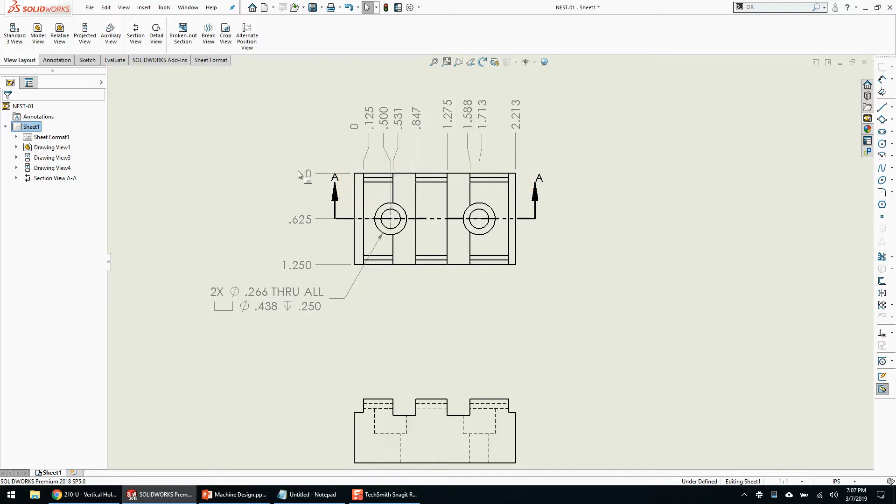Ordinates from the back or upper left-hand corner, because that's the side of your vise that doesn't move, and if you ever have a vise stop, it's almost always on the left-hand side, because right-handed people are normal, left-handed people are weird. So that's kind of how that works.

And in this instance, we have a hole callout. I must not have my normal settings loaded in here, so I'm going to override this and do what I would normally do. If you need to know more about this, you should go to the SolidWorks admin's presentations. But you can fully customize, as far as I've been able to find, the SolidWorks hole callouts to pretty much anything you want.

So in this particular instance, I would do 1/4 inch C-bore. That's what I would prefer.

In most cases there's always exceptions, and for customers we've done different things, but for most instances that's what I'd like to see. Because there's machinist handbook standards, and anything that's not to standard should be dimensioned out. If you give this to a machinist and they can't make a 2 by 1/4 inch counterbore, in my opinion you got other problems.

So anybody else can throw in their opinion. If you don't like mine, that's fine, I enjoy the banter. I would also manage white space better than this, so maybe we'll do 2:1 because those were kind of small.

That's kind of big. In the world of AutoCAD, we try to stick to nominal numbers. In the world of SolidWorks, we can do decimal places and everybody's happy, as long as we have good white space management and the details are clear enough to see, and it doesn't look crowded.

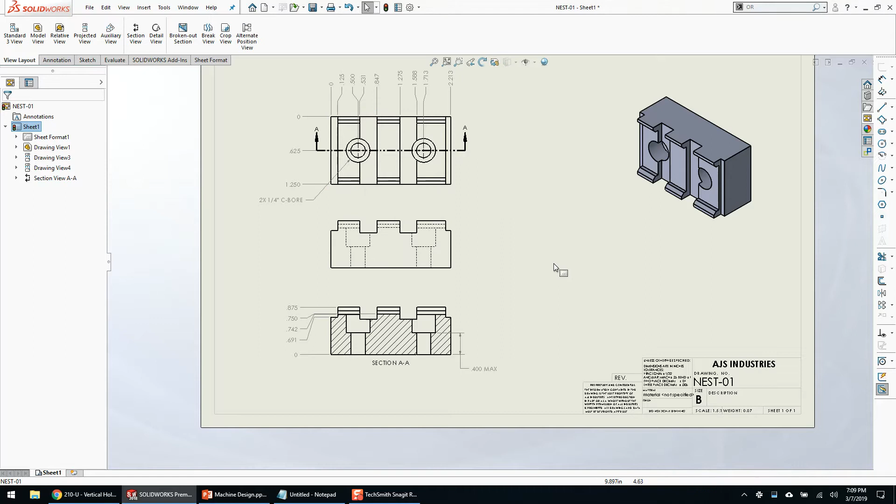But you're not undershowing your detail. So it looks like I need to do something like this, maybe, maybe not. Probably don't need that. General rule of thumb is the less number of details, the better.

Rick says I do, and he probably wants me to dimension this because that's going to be quasi-critical. So on this particular part, I probably do CNC to CAD because we're probably not going to make that by hand.

For those that didn't hear it, Rick said if you're going to CNC it, then you don't need any dimensions, and that's not what I'm going to say in my presentation. If Rick wants to have his own presentation, he can say whatever he wants. In my presentation, dimensions are important.

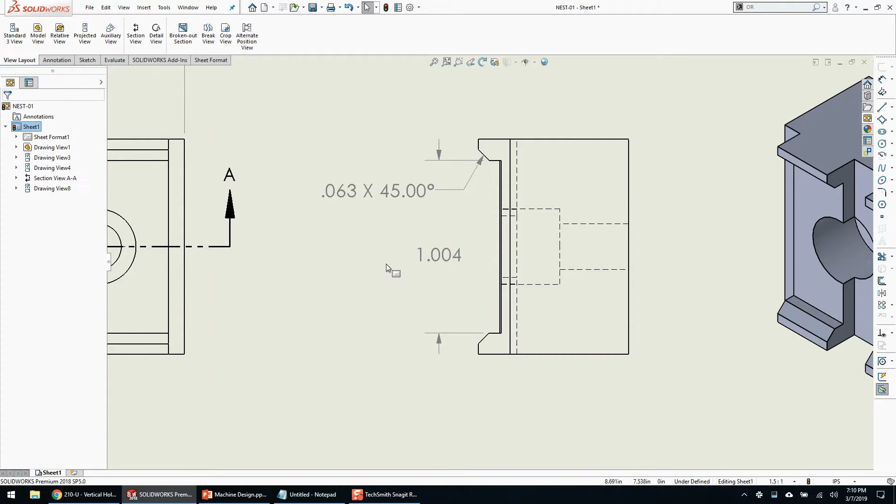So maybe you do that, and then maybe we're going to show a nice overall so the person cutting stock can figure out what stock to use. There's prevailing standards, and I think ordinate dimensions to show stock size is fine.

Some people like to see the traditional smart dimension, and they'll make sure there's at least 3 smart dimensions on their print to find stock size. I think that's a little overboard.

If the person you're trusting to find your stock and cut it can't figure out an ordinate dimension, again, kind of like the machinist thing, you might have other problems.

So a print like this, obviously missing material, missing description, that kind of stuff. But as far as the construction of the print, doing it here in the last 5 minutes and just glancing at it, we'll add a note for sure, right?

CNC to CAD data, right, you've got that. I might copy the note and paste it over here to be clear about what we're asking them to cut. But generally at a rough glance, this appears to be a completed detail minus the metadata. I don't know if anybody has objection to that.

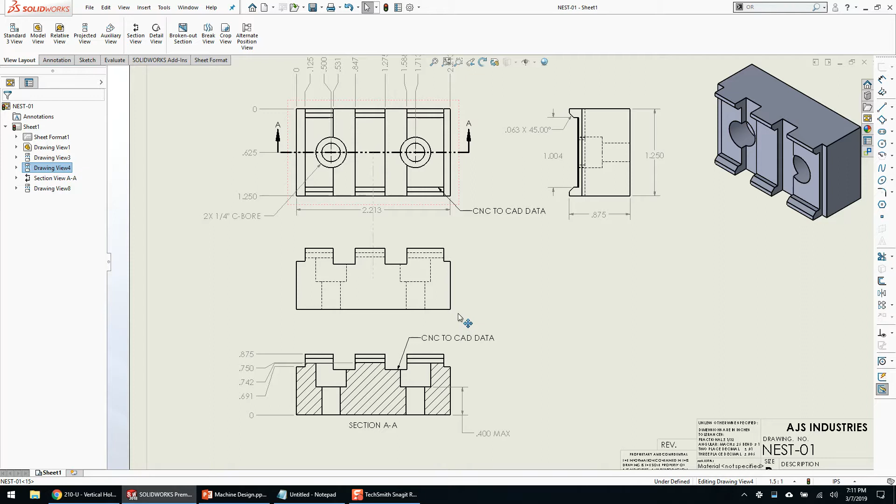It is, you're right. Yes and no. My fear is that if you look at this, it might—well, the ISO helps. I could go either way on that, but I'll take it off. Make Paul happy. All right.

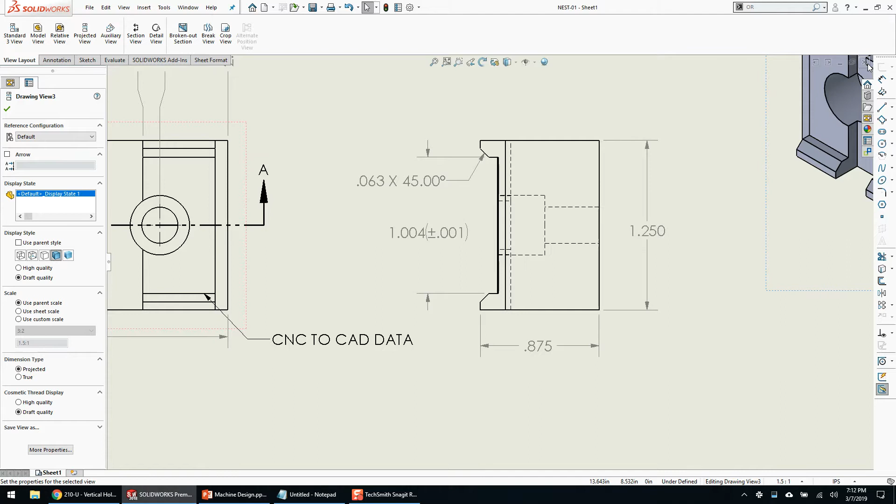Tolerances matter. Yeah, and I don't disagree. In this particular instance, because my friend Jerry isn't sitting here, I'm not quite sure how tight they're doing it. That one dimension there, right? Maybe this particular dimension would be the only thing that's reasonably toleranced, give or take. So let's say it's plus or minus a thou.

You don't want to go plus or minus a number. Why not? You should always go for the number and either plus tolerance or minus tolerance. You go for the main number and then you're overshooting the tolerance more.

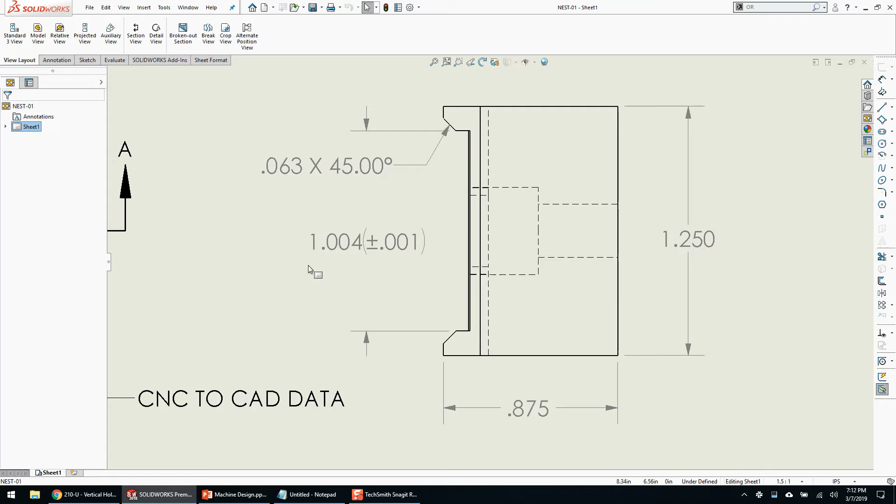In my machining days, whether it's a number plus, a number minus, or a plus or minus, you always machined for the mean and just shot for the middle. So if this said 1003 plus 2, I would still aim for 1004. I'd always machine right for the middle in my machining days. And in this particular instance, you'd go small on the first pass, but clean it up on the next pass, aiming for the middle.

Yeah, it depends on what you're trying to accomplish. If that was 10 thousandths clearance on each side, if I remember the fixture from last time, and I want a minimum of 10 thou, a maximum of 14 thou, then yeah, you'd plus 2. If I want 10 thou, but 5 would be acceptable—it all depends on what you're trying to accomplish from a manufacturing and design standpoint. Rick's not wrong, but because it's my presentation, I'm going to say that's okay.

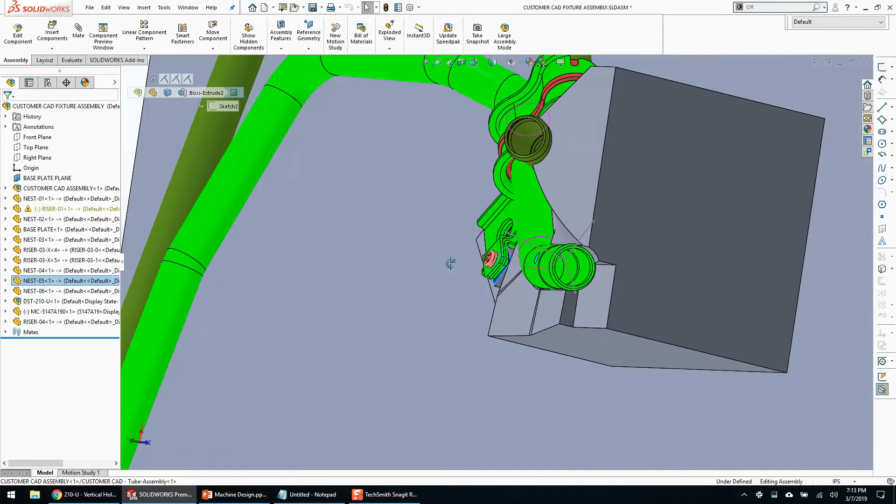All right, over here we had to do something. I think Jerry said they're driving that screw. I think we did that block already last time. I think we had to hold the pipes, hold the bracket.

Oh, we needed a Destaco clamp here. That's what it was. All right, so because this particular block is the way that it is, it would make a natural bolting area for a Destaco clamp. So let me rotate this part here and save and get out of it.

So for those of you that aren't aware, there's two different ways to open a component in SOLIDWORKS from the graphics view or the feature tree. Because I'm not super familiar with this component—I drew it three months ago—and because the orientation of the part is important to me, when I click open, we're all familiar with the far right hand or the far left hand open side. One over is open part in position.

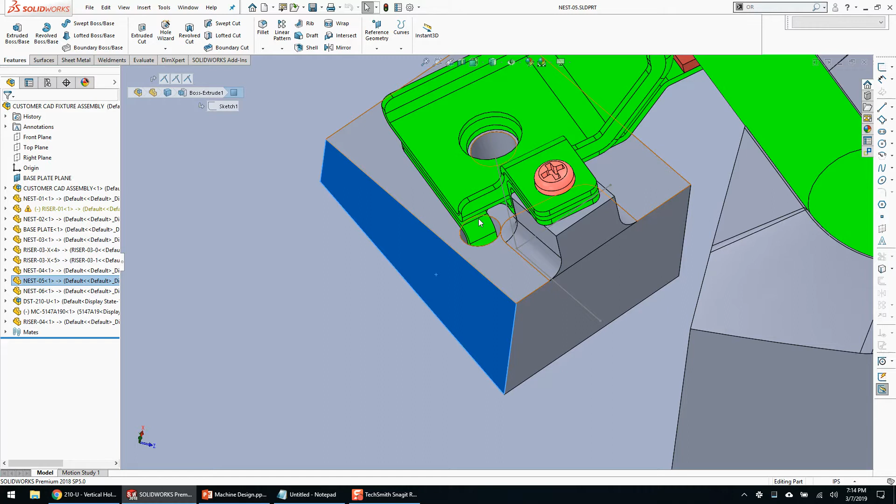The in-position option is pretty cool. When you open it, it'll open the part and then rotate it to be in the same position as it was in the assembly. So I know this is the face that I need to elongate. If I wasn't super familiar with that part, or didn't exactly know what was going on, I may not necessarily know that.

So instead of trying to figure out what dimension to change, what the design intent is, let's say I took this design over from one of you guys. Instead of figuring out the external references and what's going to blow up based on what I change, the cheater way of doing it—which in machine design, there's a lot of cheater ways that are perfectly acceptable. If this was product design, I would write somebody up for this.

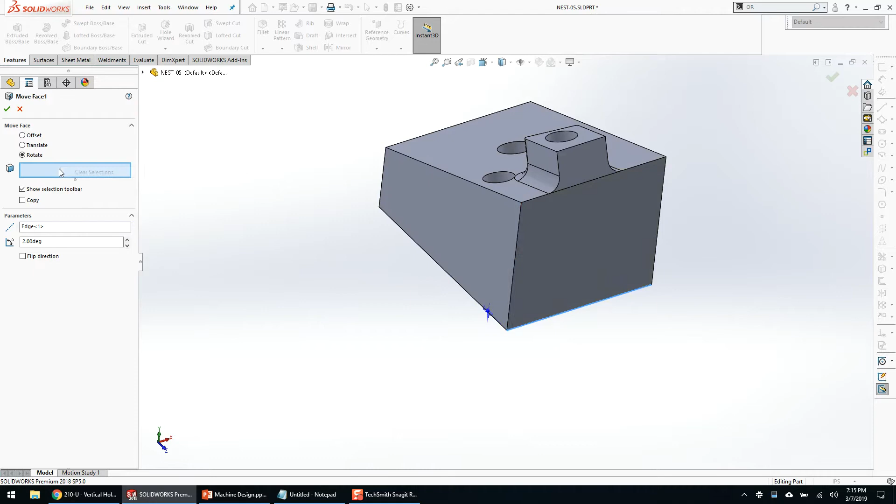But I'm just going to click Move Face and make sure my parameters are set to that edge, and then maybe say 2 inches. Did I do that right? I did not do that right. What did I not do right? Oh, I picked a face. Let's try picking an edge. Nope. I did pick the right edge. Whatever, let's just move it this way.

So in SOLIDWORKS, you can pick on any face you want and move, rotate, translate, a few other things. So let's just say that's 2.5 inches. Now the reason I did it this way, and why I say it's cheaters, is because from a design intent standpoint, that's really poor. But whenever I made that block, I got an error.

Where'd that error come from? What's an error about this? I think that block might have moved or something. Why is that erroring? Did I change something on that?

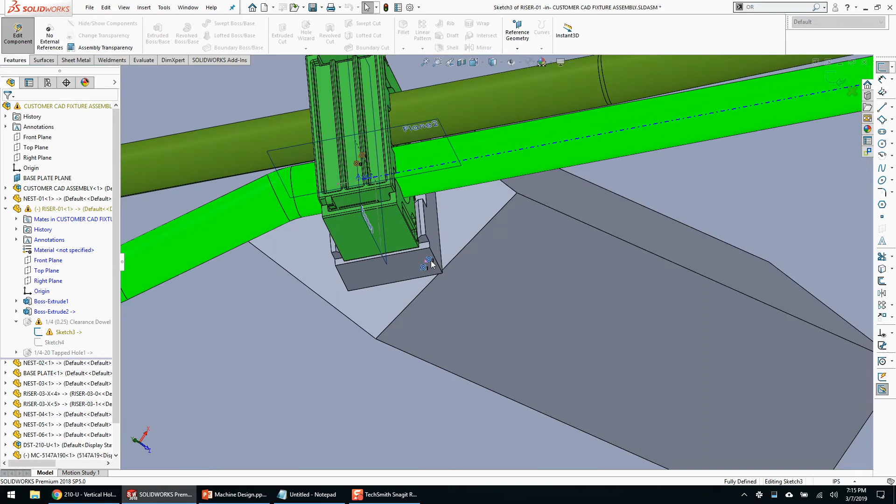Did I not save? Did I delete my dowels? I don't remember doing that. The video will tell us.

All right, well, you all saw me do it, so we'll just pretend that it's done.

So if I knew I needed a destaco clamp on this originally, I should have made that block longer originally and done it more intentionally. Because I didn't...

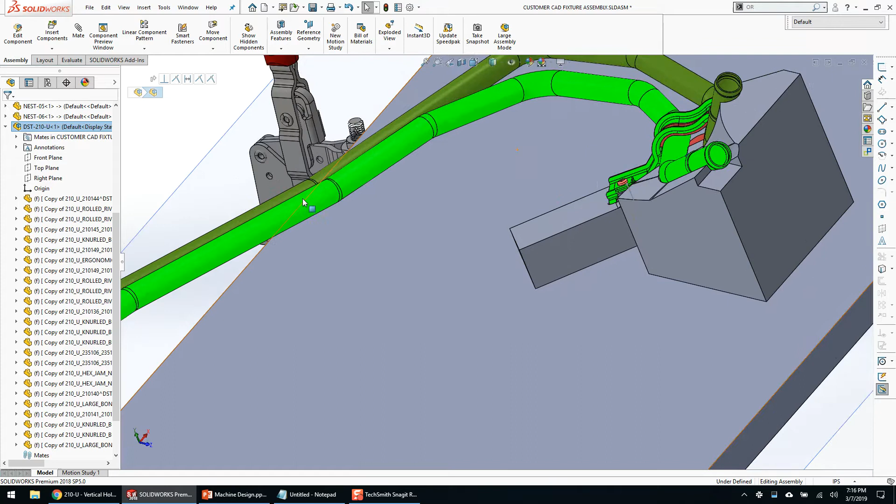Pretend it's a takeover design or something like that, I now just want to take this destaco clamp, holding down the control key, I can drag a new instance of it in my graphics view, pick on my select other, grab the base, make that in place, move this around.

Right click to drag to rotate, move it about to where I want. Looks good. Right click, drag a little bit more. Hopefully I can mate that up. Whoa, look at there. Mate that up to that edge.

So since most of us weren't here on your first presentation - yes, sir, what is your preferred method for orientating the block to start with? This block? So I don't know because I don't remember what I did verbatim.

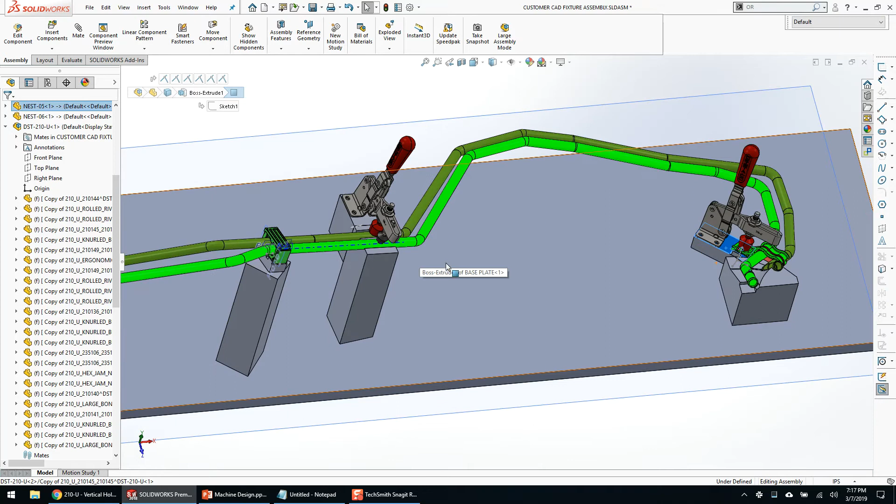So I'm going to think through what I would probably answer and we'll see if it's correct. So this block we rotated to make sure we only had the single compound angle, not a double compound angle. This block, what I'm guessing I did, and because I just broke my assemblies in the beginning, let's edit this and try to figure it out.

What I'm guessing I did is I made a sketch triad in 3D space, and then I said that it is parallel to the plane. Okay, so I knew I needed a hole so I can put an alignment pin in here.

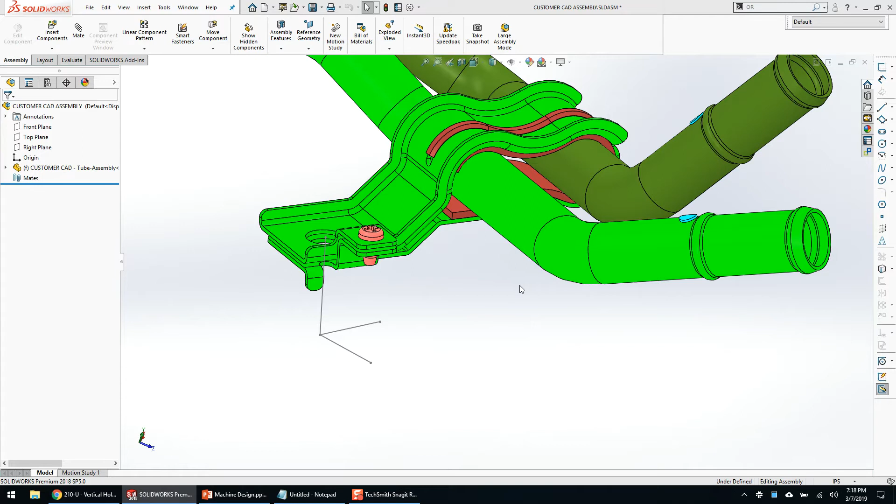I'm trying to figure out how to explain it without breaking things. Okay, I'll try to explain it this way. Get rid of that part, get rid of that assembly. So this hole is at an unnatural angle to this plate, and so I need to rotate my block in a way that I only have one angle, which is desired.

And you can do that by creating a sketch. I'm just going to delete that. Okay, so that's what it was.

So if you create a 3D sketch, that's the key. I see a lot of planes and a lot of axes, which is an acceptable way to do it. I find them very kludgy and messy, hard as a user to control and do what you want dynamically. They're not dynamic features.

I really like 3D sketches, and thinking back through here and looking at what I'm doing, looking at what I did, this is what I did. So I made a 3D sketch, and this line here is concentric to that hole, and then I put a triad on here, and all I want is the bottom of this triad to touch that plate.

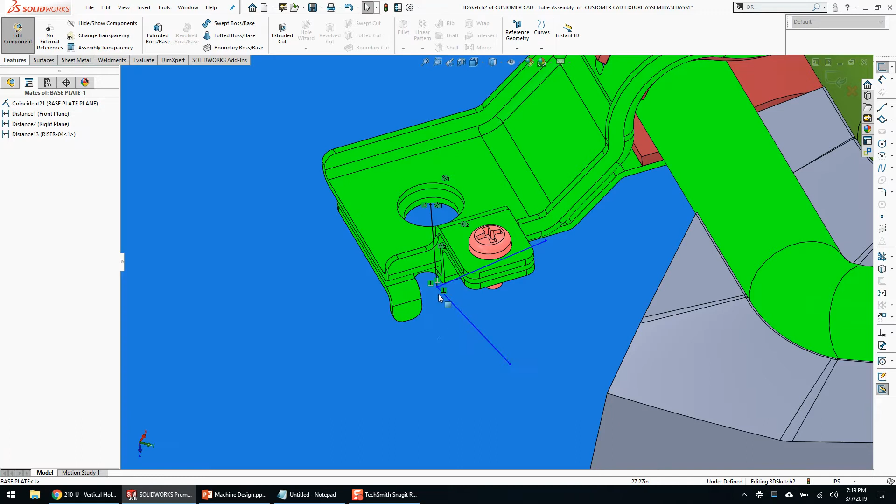So I can click on that plate, click on the center point of that triad, and then there's an on-plane relation, which if you've never played in 3D space, you may have never seen. But imagine just a line in 3D space trying to touch a table or something, and there's an on-plane. Coincident doesn't work because coincident is only on a projected view.

If I'm drawing a 2D sketch on this face, I can coincident to an edge. But you can't coincident on a non-projected view. So on-plane basically is your pierce point - where does this sketch go until it hits something? That's an on-plane relation.

So let's try to exaggerate this a minute. Let's pull this up. So if I click on that and click on my plate and say on-plane, that triad sketch is going to drop down until it hits that plane.

Now I can take any one of these members. I'm going to guess this one. If I change this too much, things are going to blow up, which would be fun. And then click on my plate.

If I do a parallel relation, so again in 3D sketch mode, we've got some non-typical relations you may not be exposed to, but there's make normal, which is basically perpendicular. There's an actual perpendicular, which ironically is different than normal, because normal is perpendicular in two axes. Perpendicular is going to only be perpendicular on one axis.

So this is a perpendicular line to the table, sorry for everyone on the internet who can't see my hand. And it could still be perpendicular like this, because from here to here is perpendicular. Normal is going to be directly opposed from that surface.

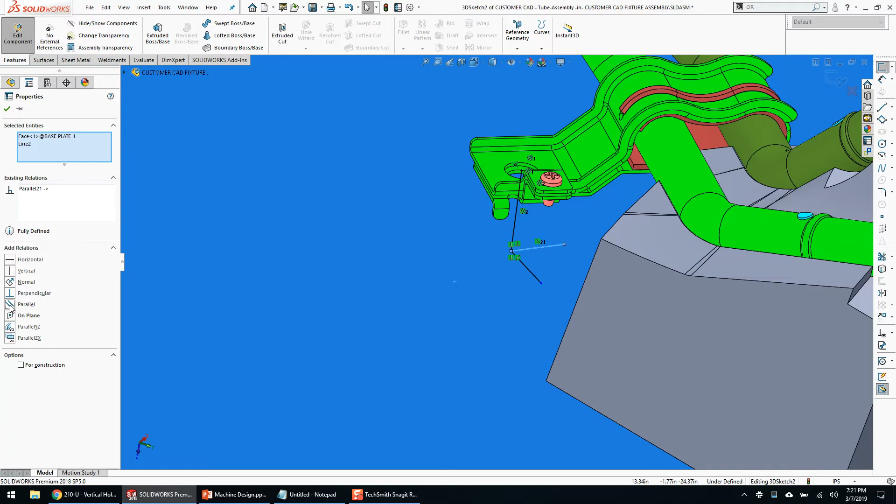And then there's on, or make on plane, make parallel to X or Y, make parallel to Y-Z, or Z-X planes. So in this instance I think I want parallel. You can see the triad move until this line is parallel or otherwise touching, or it would be on plane would be another way to do it. I find the parallel relation to be more robust.

So then basically this triad has rotated to the point where if I put a block there, I know that I only have a single angle that I have to construct.

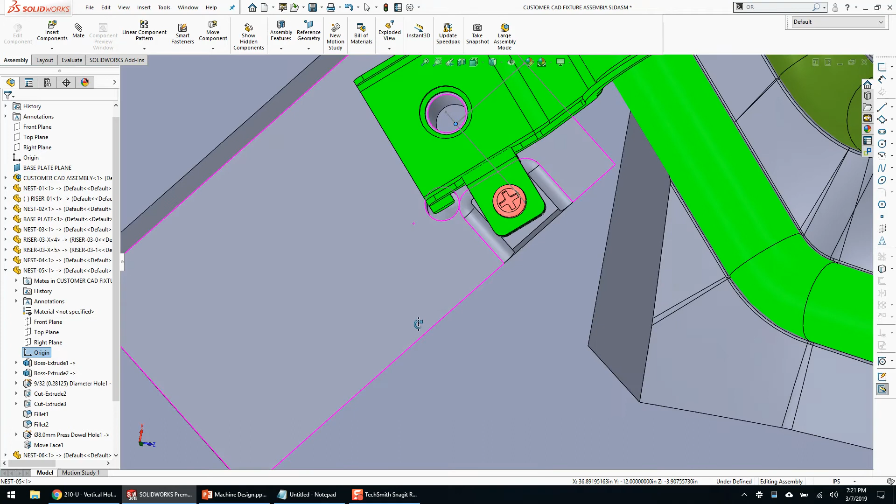So if I didn't blow up anything too badly, we show our block again, I'm assuming we're going to see the block constrained. So you can see how I used the center origin of the block, because all good designers design their parts center origin base feature. So the origin of that block is basically at the origin of that triad where that 3D sketch from that hole touches the plate. Does that make sense?

That's part of the reason why I didn't extend the face, because I didn't remember all of that, but I assumed there was something important about where the origin was and the good design intent, so I just wanted to stretch that face out and not necessarily worry too much about what I had done or breaking it.

It's been a really interesting experience for me doing these 2 hours, 3 months apart. It's almost like Rick just gave me his design, because I don't remember what I did 3 months ago, much less in the 2 hours I tried to cram through this stuff. So this has been really fun for me. Hopefully you guys like it.

And you'll kind of see that I still have a lot of those sketches turned on. So I did do an axis here just because I needed a single line down the center of that tube. So that makes sense, 3D sketch does not.

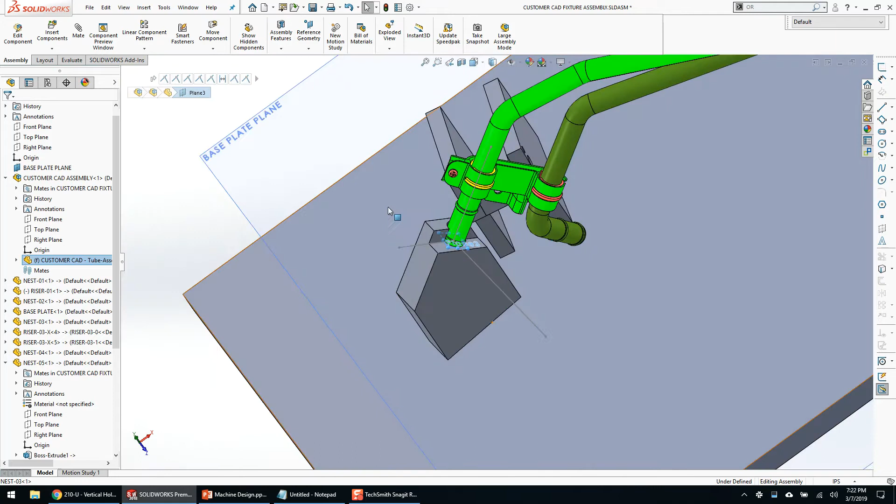But then over here it's going to be the same thing. I wanted to make a single angle on this part and make it against that plane so that we could put the part on there. So I just drew a triad 3D sketch centered on that tube, rotated this till it was parallel.

And this is a lot easier to see, right? We can see if we measure that these are parallel. And so as long as you can orientate your part perpendicular to that parallel edge, it makes for much more simplistic machining and a lot simpler setup, because instead of planes and axes and multiple stuff, that's all compounded and I think not flexible and pretty kludgy.

This works really well. So I don't know if that answers your question or... Yeah.

Any other questions? Trying to get to the point of design intent. Good question, Todd, I got it. Is that how you would have done it?

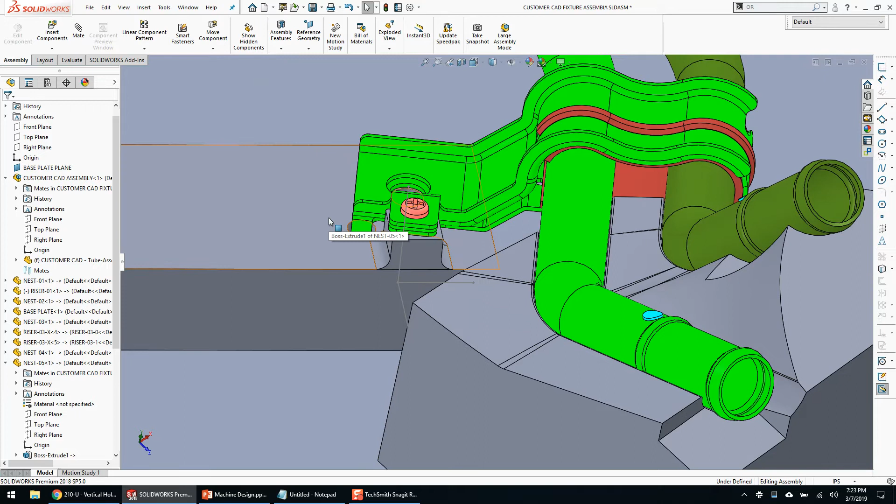Similar. Okay, sweet. Probably, I use planes a lot for orientating it. I like planes when there's no other option, or like in this instance, it's a reference plane, right? Because I want to work down to this plane level, so that makes sense if it's transcending parts and stuff like that. But yeah, anyway.

Yeah, I worked off the center of the part. Good man. Your first extrude should almost always be a mid-plane.

All right, so it looks like I need a little bit more over here. I don't remember if this trick works or not, but let's try it. I want to extend this face over. Yes, I'm being sloppy, let's constrain that.

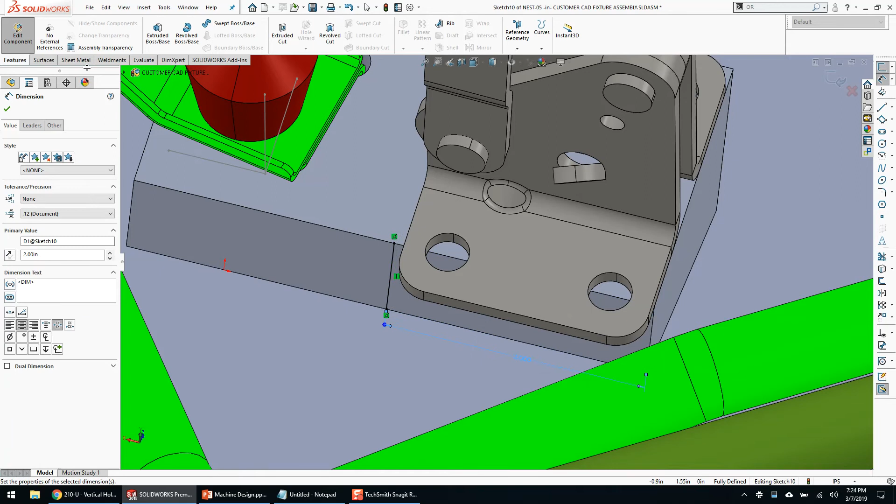In that instance a coincident would work. This is going to be 2 inches, let's just say. And under features, under curves, there's a split face. I think I can split that face.

Now, is it going to let me move that face? I don't remember if this works in this instance or in a certain other instance. Where'd my triad go?

Nope, does not work. All right, no problem. I don't remember if this is normal enough to do. It should, if it's simple. So I should just be able to convert these two entities, convert that one, flip the inversion on these, draw a vertical entity, connect those up.

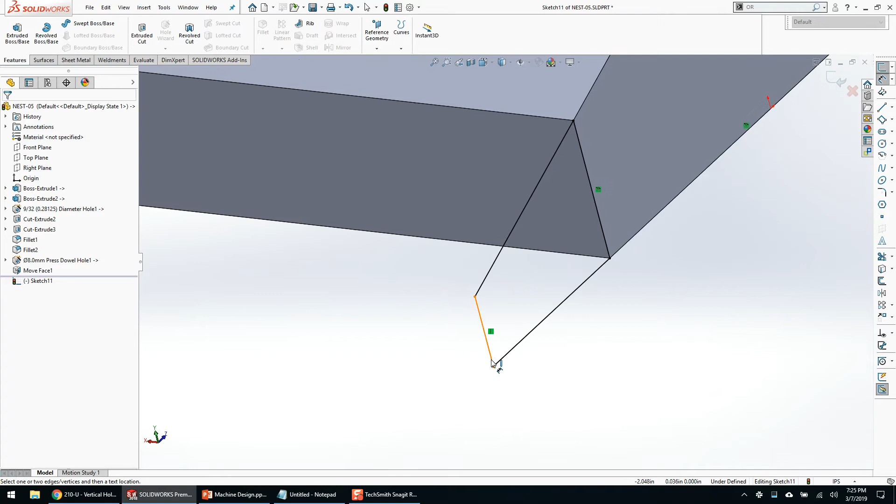Merge, not coincident, that's always fun. In this instance, what's important to me is the distance from here to here. I'm trying to meet that clamp. So I don't know if 3 inches is good, but we'll extrude that this way. 2 inches, I think, was the number there. Good enough.

Where am I working? Here? Yeah. All right, so the clamp base is roughly 2.5, so we'll do that.

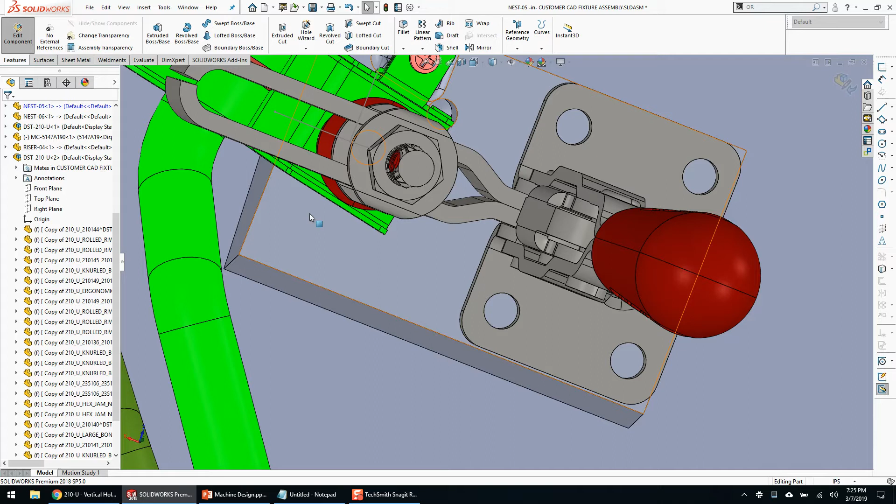That looks good. So put in holes, I think we've all seen holes. I could probably have run that extrude all the way or just done a face because I don't know that room is going to be at a premium. So if you just double click on a face on an extrude create or an extrude edit, it'll change that extrude end condition to up to face. It's a really easy way to just double click. The face turns pink that you double clicked, the feature changes to up to face, and then you can right click to rebuild. Kind of a fun way to quickly power through that.

So put in mounting holes again. In this instance, because I don't perceive there to be any interference, I would have to do holes at some point before I give the design off to manufacturing. But in the scope of what I'm trying to do today is to see if the design fits, to get to a design review state.

Because when you're designing like this, assuming you work in most normal environments as I do, you have to get to design review state first. Your boss or your customer or somebody reviews it, signs off on it, yes, that's a good design. Yes, the Destaco clamps work. Yes, SMC is approved pneumatics for this vendor, whatever it might be.

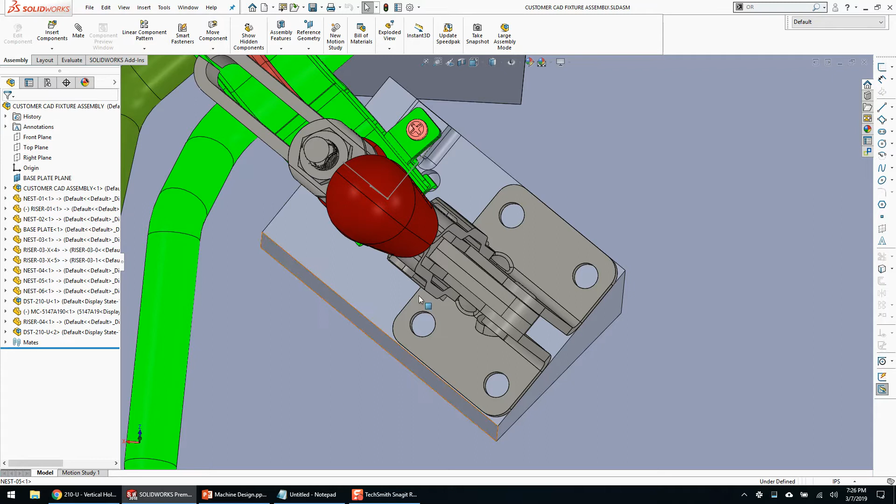Then you go back and add all the detail. Adding holes now would probably be, there's probably no way in which I would save time, because if I add holes now or later, it's the same time, but there's a higher chance I'm gonna lose time because the two constant rules in design are everything changes and everything breaks. So there's no reward and only risks to add the holes now. That's why I would not add the holes now.

I'm sorry? Is that why SolidWorks crashes?

Can't answer that. Do they have to meet the rule? Oh, because everything changes and everything breaks? Yeah. No, looks like I didn't finish this part. We should do that, that would be fun. So it looks like I need to relieve this a little bit more because there's this ring around there.

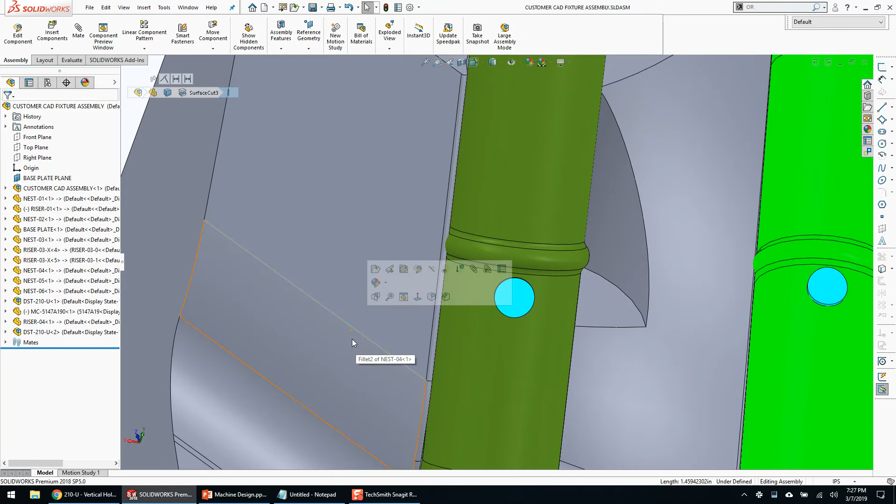I'm just not ADD, although I am a little bit, but constantly while looking at things, I always look for interferences, right? SolidWorks does a really good job at showing you a soft line or a soft edge. A hard edge has these black lines on them. And so anytime you see a hard edge, you know that you're seeing the abrupt edge or a tangent edge or something like that from your design. So I just noticed that this is a soft edge where you don't see a hard black line, you just see the melding of two colors. So that's going to tell me that we have geometry interferences.

And there are evaluate tools that you can do that. There's clearance verification. This is probably going to take a long time to run or maybe crash, right? Who knows? So I have to select the entire thing. This is kind of where the automatic tools in SolidWorks are frustrating. Okay, you surely should have detected a clearance. A, they don't work very well evidently, or I don't know how to use them.

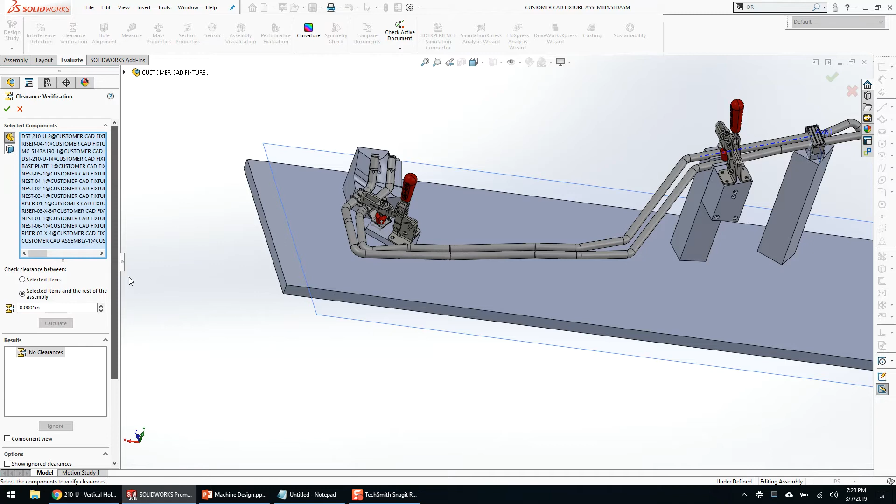But B, if you don't know exactly what things you're trying to check between.

Okay, now it worked. Oh, but it's finding interference on itself. That's not helpful. Well, there's some settings. Obviously I don't use this very often. I've never found it terribly helpful. Maybe if I was better educated on it, I would find it helpful. But it's the same thing with the hole alignment tool, I just don't find them helpful.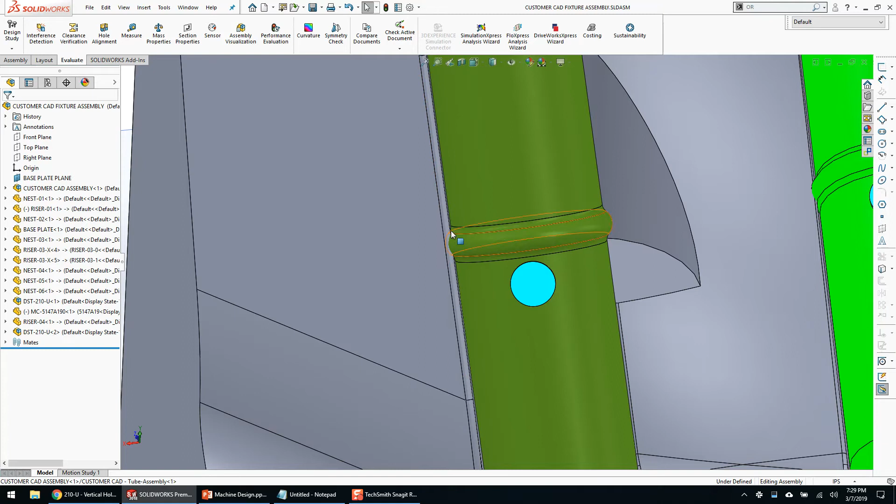It is very helpful, but there's settings farther down you've got to get right to show what you want. In a multi-body part instance, I do a lot of that from a Boolean operation. In the assembly, I don't know if I just got lucky or spend too much time looking at my designs and catch them myself. But in this instance, I noticed from a soft edge to a hard edge standpoint where the green and gray are melding, that's a problem.

So it looks like I did a relief here. I don't know if I didn't define it—hey, look, I didn't define it, and the relief moved or something. So let's figure this out. Let's move it over here.

And again, if this seems unscientific, it is. Sometimes it's not specific enough to matter. Like as long as we're holding the tube up here and holding the tube down there, whether I remove an inch, an eighth of an inch, or half an inch, nobody cares. So spend the time and add specific detail and accuracy when it's important, and when it's not, don't spend the time. Part of being a well-seasoned, good designer is knowing what to spend value-add time on, and what to skip over.

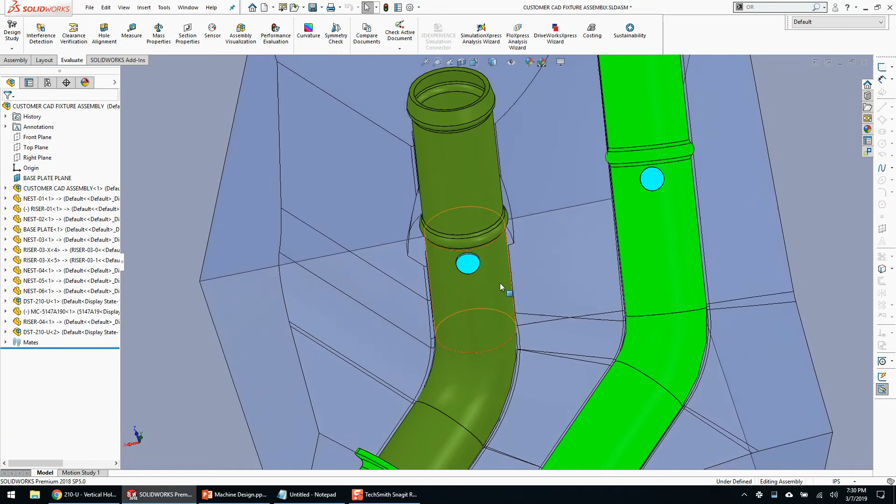So that's certainly my clearance rate. I could easily adjust that and clean it up, and probably would when I get to the detail side. But again, from a design review standpoint, this is now design review ready—I could show somebody, and maybe my customer or my boss is going to freak out that I have a sharp edge here where they could catch the tube on it. So maybe I have to fix that sharp edge.

So maybe, and again I opened it up in position so I can find that easily, maybe I would move this cut above the fillets, edit that fillet, and see if I can't fillet that edge as well to soften it. Go back to SOLIDWORKS assembly, and maybe that looks better now.

Whatever, who knows? Maybe I should radius the edge up there, but you're not going to be able to get a ball cutter in, so you're going to have some problem there.

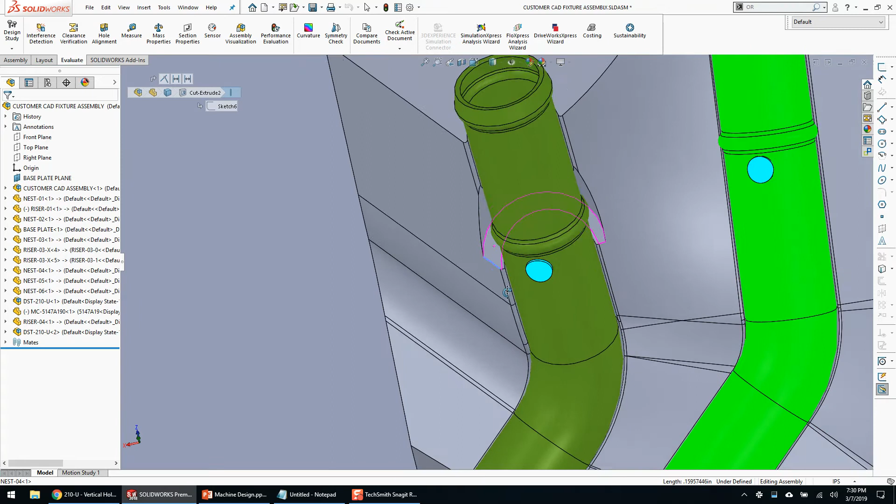But that's the concept. So you've got the staple clamp holes. Looks like we can still get a screw gun in there, although it depends on where the operator is. Is the operator on this side? Looks like it, so at least the screw is forward of the operator from the staple clamp. Otherwise you might need a low profile clamp or a clamp from the other direction to gain access to that screw. So not only think about the machinability of it, but how is the operator going to use it, and how friendly would that be?

Pretend we need to put another staple clamp on there, but it's pretty much the same as that, and you all saw me do that already. I'm guessing that's an alignment pin, and we need a staple clamp here—you saw me do that already.

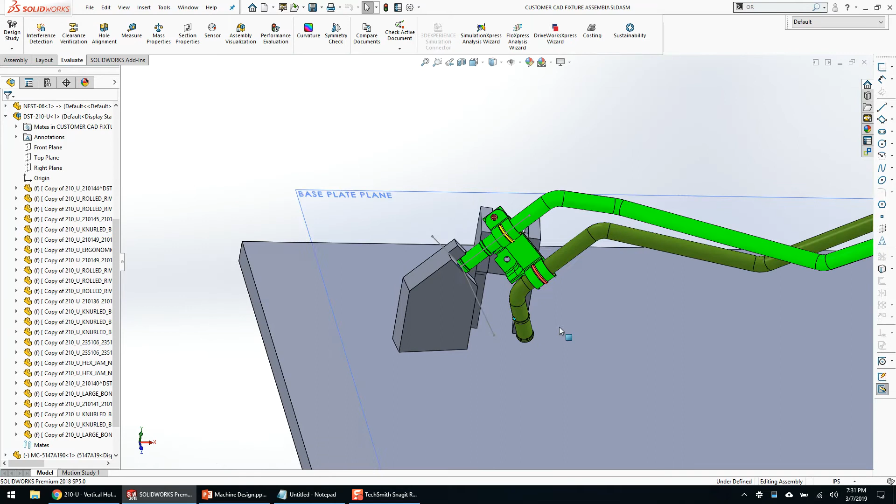So I don't know, I can make more 2D drawings. We could add a pneumatic cylinder and just make something up. What do you guys want me to do?

Show the clamps open. You had to say that.

So when I downloaded this as a parasolid, it just dumped it as a bunch of parts. I made the parts virtual, so they're all embedded into the assembly. But this is just a fixed blob right now, so now Radar wants me to make it an unfixed blob.

So this will kind of be fun. You first have to identify the components that you need to unfix. So those first four, handily enough, don't need to move, neither does that one. So I'm going to put those in a folder called base.

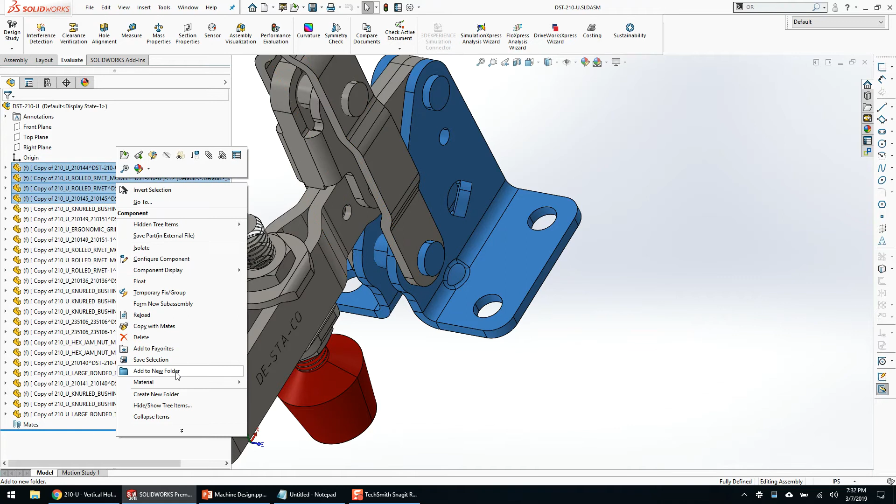All right, what's next? So that should move together, and then here's the other thing - I hover over here and I don't know what that is. It's something in the middle, guessing one of those rivets or something. I don't care, so I'm just going to delete it. It's a virtual part, it's gone. Oh, wrong part - I don't care, it's a virtual part, delete it, it's gone. I'm not going to spend the time.

Unless your designs are so big that extra detail on a staple clamp is going to radically slow down your computer, I don't necessarily need to spend time cleaning this up. But if I do have to clean up and show kinematic motion or do something, then I don't want to spend time on unnecessary geometry that serves me no value. That's why I didn't bother cleaning up or deleting anything before, and why I am now.

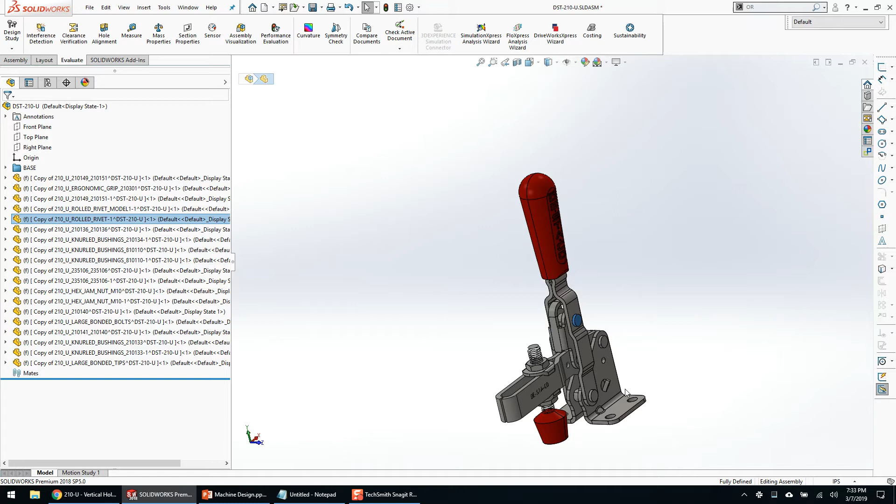All right, so we've got these components that I think need to move together. Oh, not the last one - just those. It looks like I got a couple pins I could include. So again, I'm hovering over and seeing the graphics previews to see - what are those little washers? That's frustrating. Do we care about those? Nope.

Okay, so we got handle, handle, handle, pin, bushing or something, not sure. This is the problem with imports, right? There's no particular rhyme or reason.

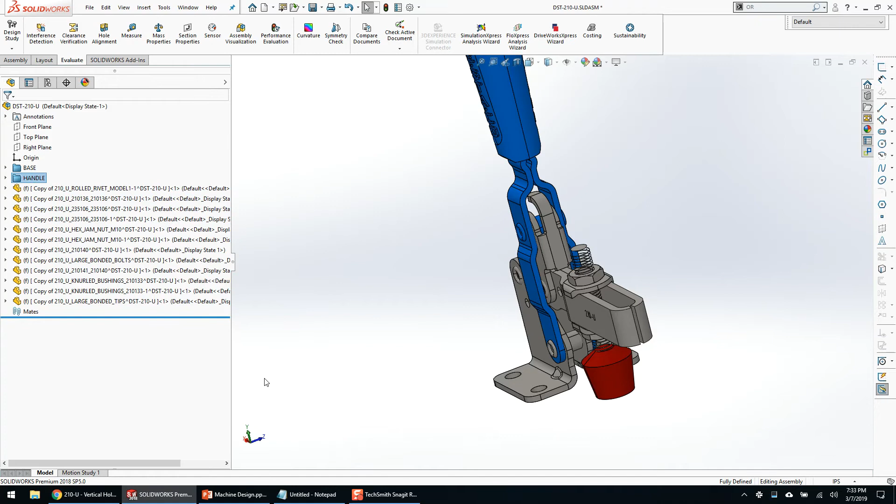Okay, I think that looks good. So that's the handle group. And then I think that's going to be the link group. Okay, all of this is fine.

Again, I'm not sure - I think that's a bushing or something down there, I'll just delete it later. Not sure what that is, delete that later, and that. Okay, so this is the arm group, and these two things we're just going to delete because I don't know what they are - not serving me value. So now that I have these groups, I'm going to unfix them one at a time.

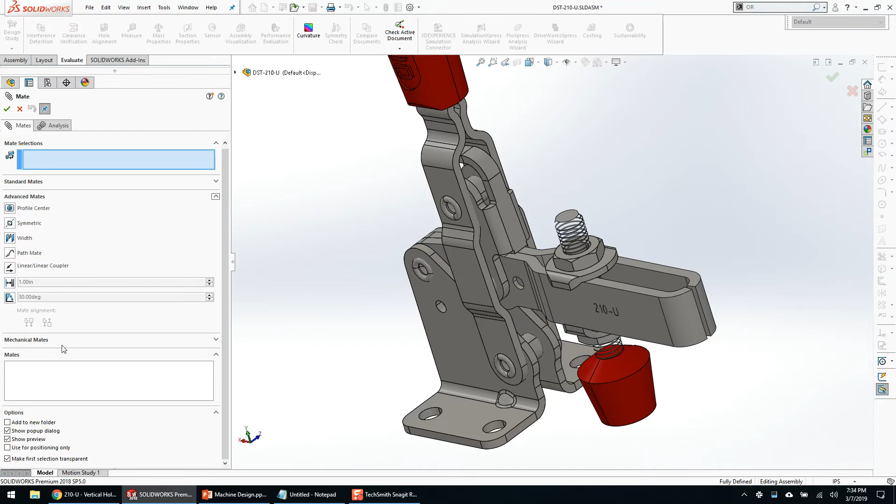So, floats, shift select them again, and mates. In advanced mates - nope. In standard mates, yep, you can do a lock mate, and basically lock all of these together. Come on, SolidWorks. Let's try that again. Shift select, mate - well, that's irritating. Seems like I've done that before.

Okay, let's try it a different way - pick them in the graphics view, maybe that's faster. Well, let me pick two. What have I - I've done this before. Okay, new idea, we're gonna shift select and say form new subassembly.

And the new subassembly is gonna be called arm, and we're deleting the folder. Another good instance for the use of virtual components - I created a subassembly, didn't create a file on the hard disk, didn't care. We're gonna create a new subassembly again.

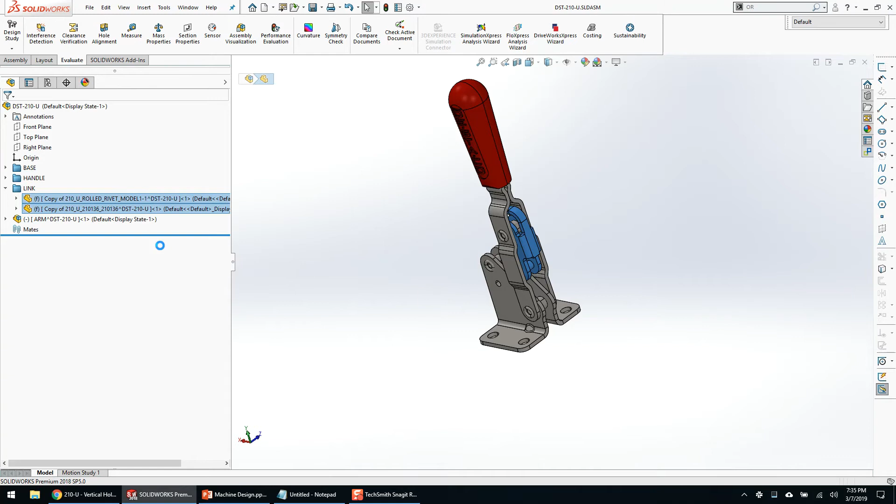Calling this link, deleting the link folder. Create a new subassembly for handle - again, just selecting on it and F2 will do a rename. Handle, delete the folder again. I don't really care about this, I don't need to create a subassembly - it's just all fixed, it's the base.

It's fine, whatever. So now I should be able to drag these subassemblies around, and I only have to make the mates of the subassemblies that I care about. I don't have to mate every single component. Now obviously, if you open up the assembly and start dragging stuff around, things would be bad, but they're all fixed inside of their relative subassembly, so I'm not too worried about it.

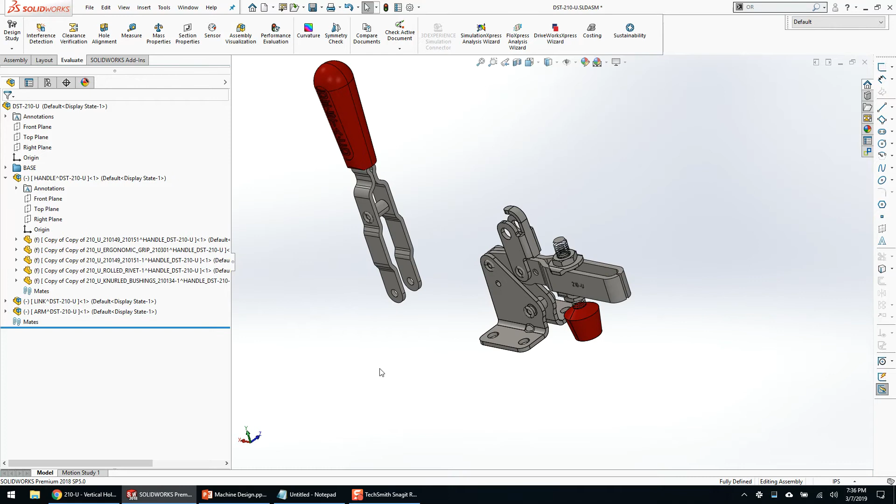So let's just undo these so I know how to mate them up. So let's grab that and do a concentric. And then let's grab this and that and do a concentric. Let's grab that and do a concentric. And then let's grab this and that and do a concentric. Now we should be able to see they're all working together.

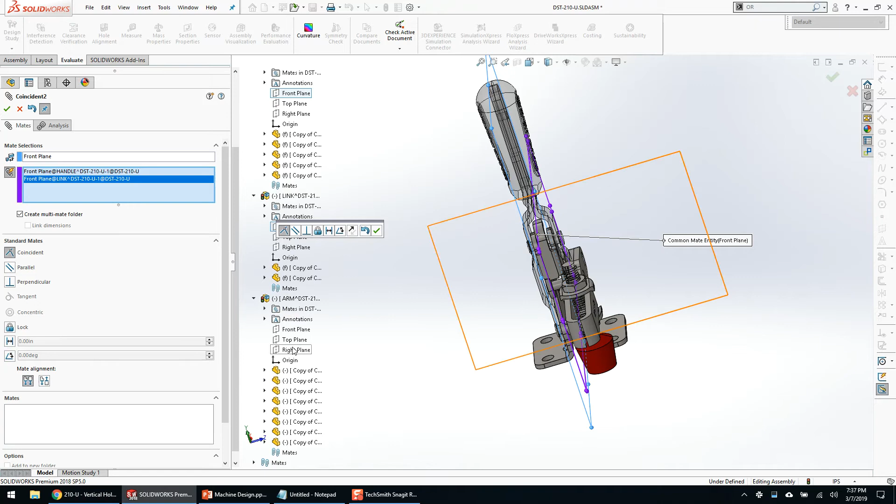Good, so now let's see if I can find a center plane like that. Let's see if I can run a multi-mate on the center plane. See if I can, by random luck - my assemblies should be created at the same origin of the collection of parts, so the same front plane per subassembly most of the time, if done what I did, should work. So with a relatively minimal amount of work, it's the smallest amount of work I know of how to get there. I don't know if anybody else has a better way.

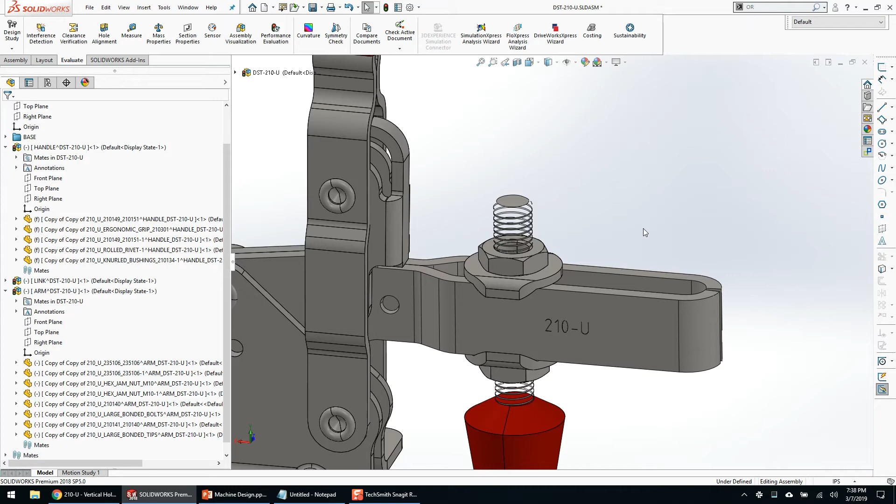For my one-off fixture machine design, I just get it out the door, because I can't justify an hour of cleanup if I'm not going to use it in multiple projects for the next 30 years. Your profit value, cost of opportunity, and return on investment differ greatly based on your industry. So if any of you are from FOG and say this would never work at FOG, I agree - FOG has different policies, so on and so forth.

But this works really well. The subassemblies, the common coincident mate - notice I have a multi-mate here, which has one plane of my base assembly with three other planes. Your multi-mates are helpful for cleaning up your mate tree and speeding up SolidWorks, because SolidWorks only has to find that one common reference and matches these three common references up to it. If you did three individual mates, it has to find one reference mate, then the same reference mate again.

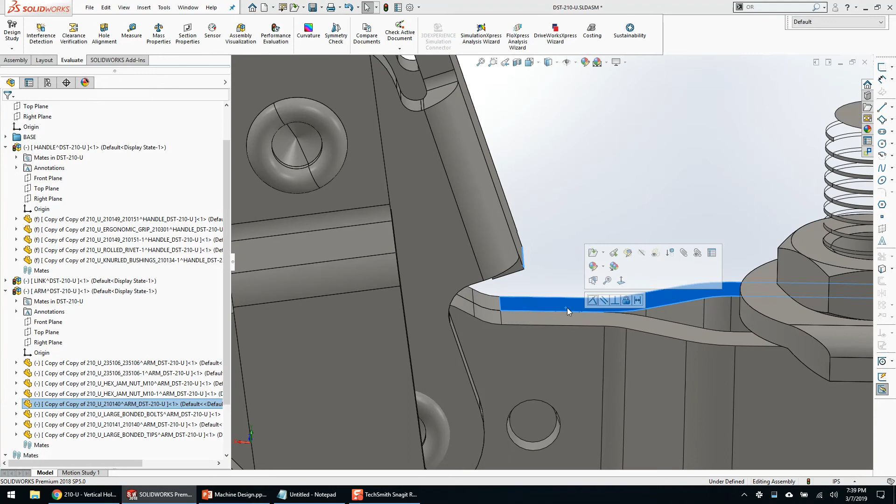So it saves CPU cycles in that context. Now, as far as constraining this goes, there's a couple ways you could do it. Doing an angle mate here is probably going to be the most robust. So maybe I want to take this edge, take that face, and mate it down. Excuse me - whoops, I did not mean to do that. Pretend I didn't do that. So let's take this edge, take that face. Instead of hitting my quick mate, which is what I did out of habit, hit the M key - that's my keyboard shortcut - but you can also click on the mate symbol.

Down below, there's an option called Use for Positioning Only. Any ideas what that does? Positions it, but it's not a mate - there's no mate in the feature tree to go delete, which is what I just did. But it will accurately position it exactly as a mate, so it's in the same spot. That doesn't constrain it, I can just move it back again, but it gets it in the right spot.

So now I can pick my top plane, or maybe the bottom of my base or the top of my base, pick this edge and do an angle mate and just accept the angle mate, because I don't have to figure out what the angle should be or change the angle mate every thousandth until it touches or whatever. So that would be my closed mate position. Let's save this to closed.

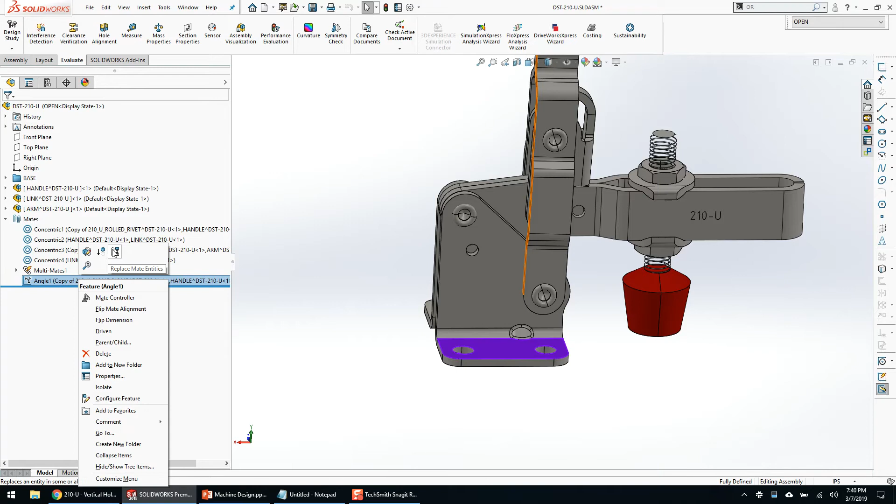Let's do another one for open. So let's say I want it open - let's suppress this, I'm on my open configuration. So let's suppress that closed mate. Go like this - forget, in Destaco clamp world, what limits it. Oh, it's this on this. It's that, right? Yeah, so that's going to be a little bit hard, and we don't really care - it's not that accurate, so we'll just move it till we see a little bit of interference.

That's just an upset on the nose - yeah, I think that's just the stamp, because they're not as precise about their open. So again, another angle mate, just accept it as fine. I always like to rename my mates, closed, open. If they're configuration specific, I would right click on them and do Configure Feature.

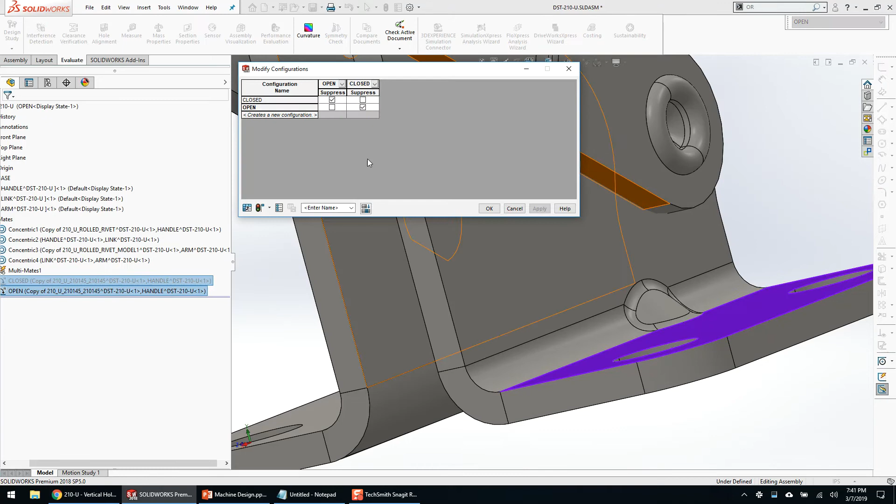Make sure my suppression is working appropriately - the open mate is suppressed on closed, and the closed mate is suppressed on open, as it should be. So now, as I toggle between them, we should see our Destaco clamp work accordingly. Save and close.

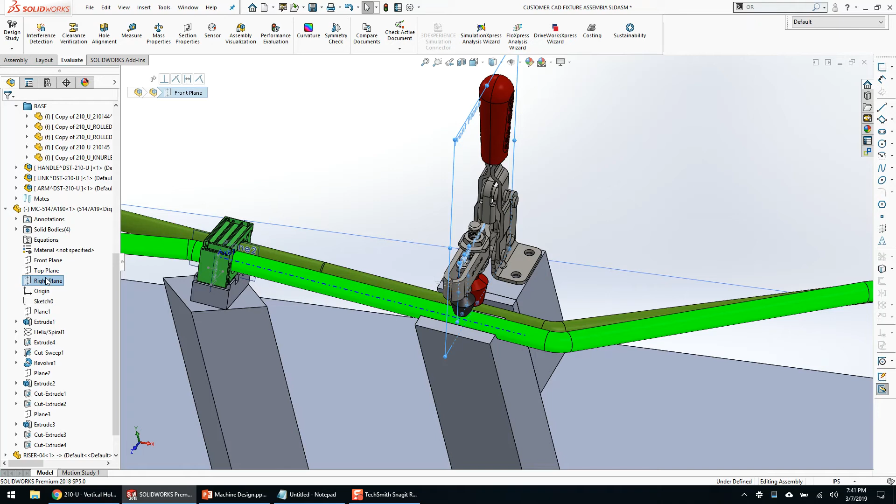And then I should be able to, with breadcrumbs, pick this. Oh, I think they fixed that in 2019, but it doesn't work here. All right, what is it complaining about now? That is not happy for some reason. No problem, let's find out. Here is that plane, here is that plane - coincident, good enough. So that may blow up now, I'm not sure, we'd have to constrain it differently.

If I click this and do open and green check, I've now simulated that open inside of the assembly. Part looks like it's clear to come out, no problem at all. Same thing here, we can just do an open, green check. No problem - maybe a problem, should be able to lift it up and over. I think these clamps are probably twice the size they need to be for the application, but you could modify that clamp a little bit in orientation or size to fit that application a little bit better if you really wanted to.

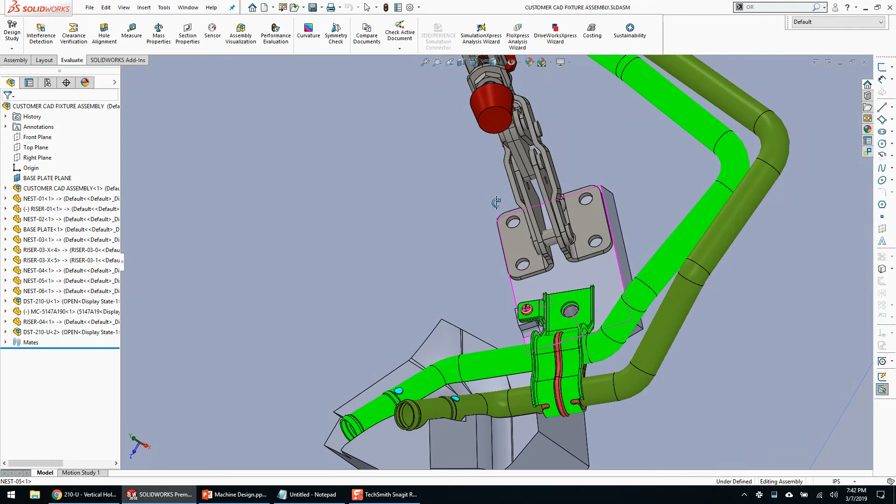From an imported parasolid with a bunch of parts to making it work, that seems like the easiest way I've found to do it, if anybody has a different or better idea. Now it's not necessarily the cleanest, and if you're going to use that as a library model for the next 20 years, I'd encourage you to invest an hour of time to clean it up.

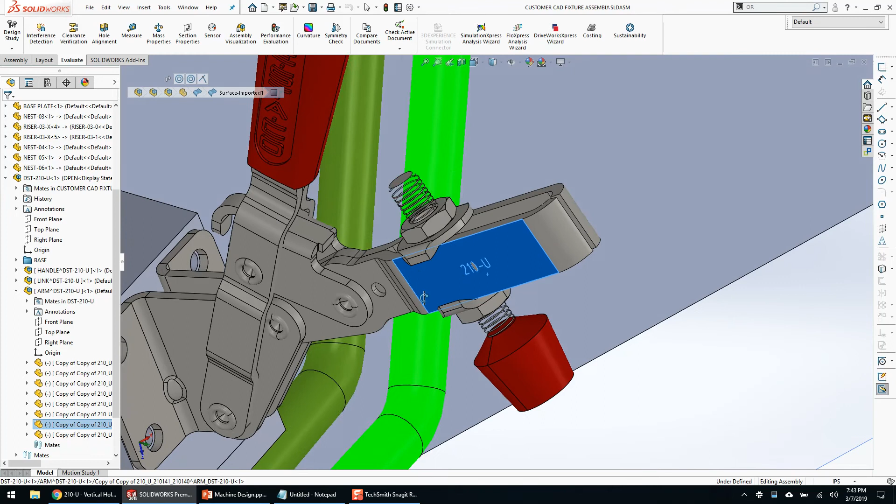Yeah, look at the number of triangles in that. By the way, a really great way to visualize the number of triangles. Does everybody understand the triangle count? We've got 15 minutes left. When do we start, 7? Yeah. Everybody understands the aspect of triangle counts in graphics view generation, right?

I believe this to be a true statement: all CAD software in the world uses triangles to calculate geometry, because you take 3 points in random space and put a face between them, and if you do that in small enough pieces, you get the right result.

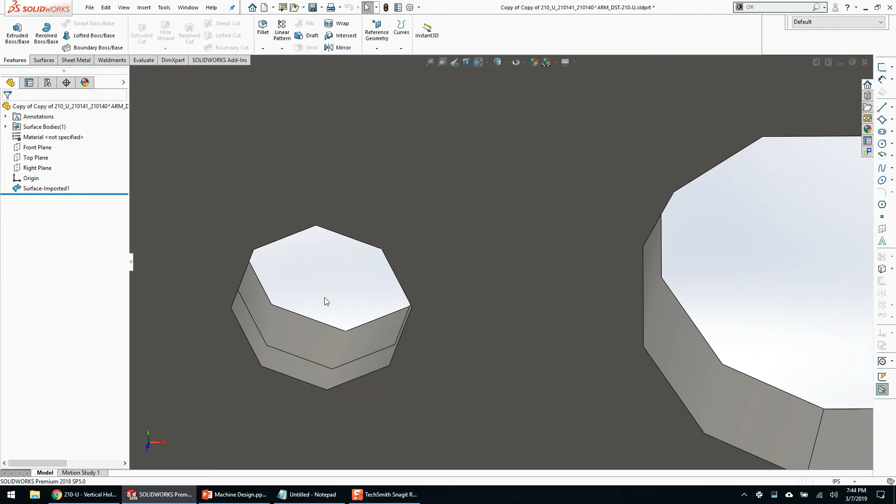The way to see how SOLIDWORKS generates stuff is you go to Document Properties, under Image Quality, and turn it way down. You can see you get this octagonal hole, if that's a word, because everything is a triangle. This would be 4 triangles because there's a split there for some odd reason, but you'd see there's 2 triangles nested here, and 2 triangles, and 2 triangles, and 2 triangles.

So if you take your graphics performance and crank it up, which evidently mine was pretty high, I don't know why, under Document Properties and Image Quality, we crank this up to the sweet spot and SOLIDWORKS will regenerate, and you can still see a little bit, but it's much improved.

The easiest way I've found so far to visualize what the triangle count looks like and its effect on graphics quality is to do a Save As, dump it to the desktop as an STL. Under STL options there's coarse, fine, and custom. Let's just do a coarse STL example and hit save. STL is for 3D printing.

Did not mean to do that, but okay. Desktop, all files. Nope, can't open a movie file. Let's try that again. Desktop. Did it not? There it is.

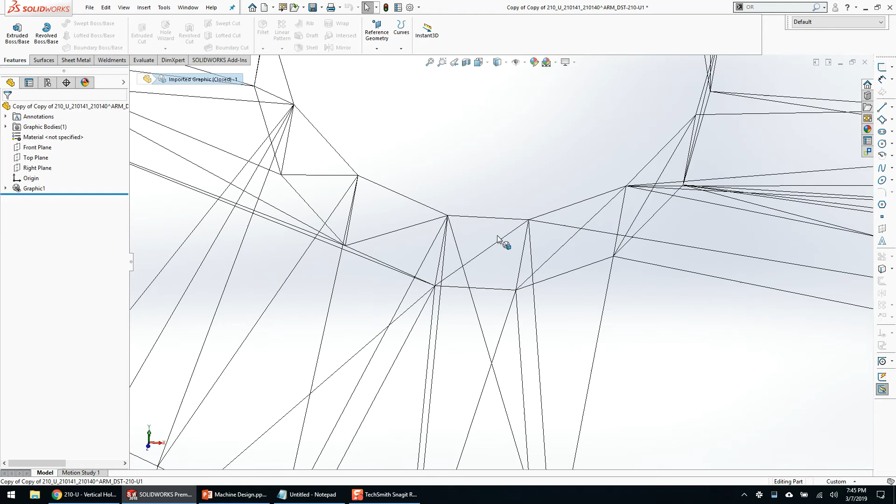So this is an STL, and this is how the triangles look. You can see here in trying to generate that hole, there's 2 triangles nested with each other. This is how the graphics engine is actually processing the graphics in real time in SOLIDWORKS.

So you can see how a flat block, which has 6 flat sides, would have 12 triangles total. If you put a fillet on one of those sides, your triangle count goes from 12 to like 300. The more fillets, the more complexity. So the STL is a really fantastic way to visualize the triangle count.

And you can see here at this text that Paul and I were batting about, you can kind of see the triangle count. This is a coarse STL export, so you can see the triangle count here, what should be just a couple flats.

So going back to SolidWorks, the other part here. Yep, you can, but that doesn't show you the triangles. I like to visually see the triangles, but you're correct that the triangle count does give you a count. You are not wrong. So let's do another one, let's do a fine export.

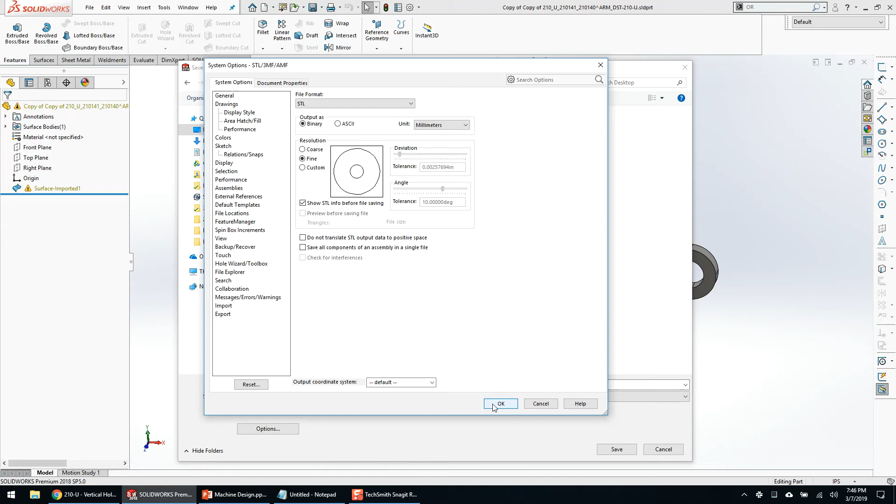Actually, I was at a customer in California last week, and the fine STL export in SolidWorks settings wasn't fine enough for their 3D printers, because they had high enough end 3D printers and specific enough details that they needed something more than the SolidWorks default of fine for STL export to get a successful print. So they're going in there and cranking up the settings even more. But this is what SolidWorks considers fine.

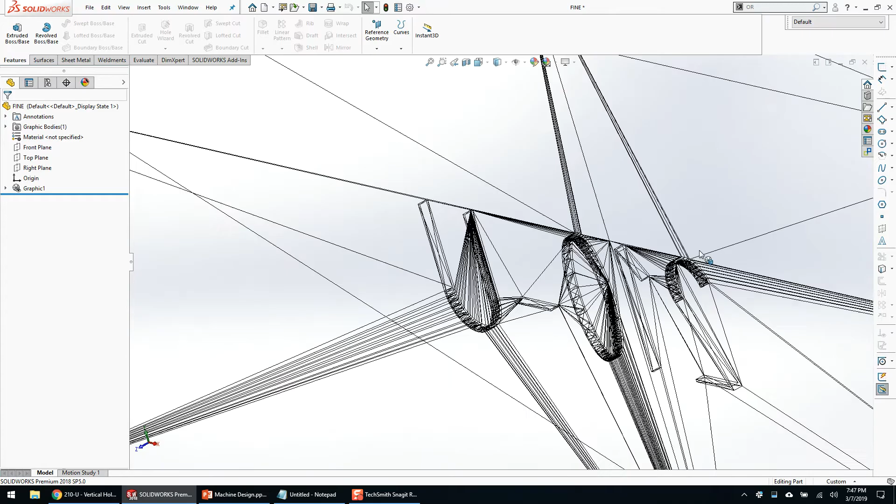Fine, meaning precise, not fine like it's okay. You can kind of see where some of this just looks solid, because as you zoom in, you've got that level of triangle count. You can see where they're all coming from, because you've got that focal point in your text circle there, the O. This doesn't rotate worth a crap, but you can see how the triangles are working. So as you crank up your system settings, especially a feature like this...

Now I'll add a few fillets just because that's going to be fun to do. So let's just fillet... nope, not that side. Stop, should not have clicked on that. If I knew I saved everything, I would just force close and reopen. Any other questions?

All right, we're back. So let's pick on this. Do an 1/8 inch for fun, and then let's do a fillet on this, because fillets around holes, those are super good. Meant that to be different. Let's do that just so we have a little edge there.

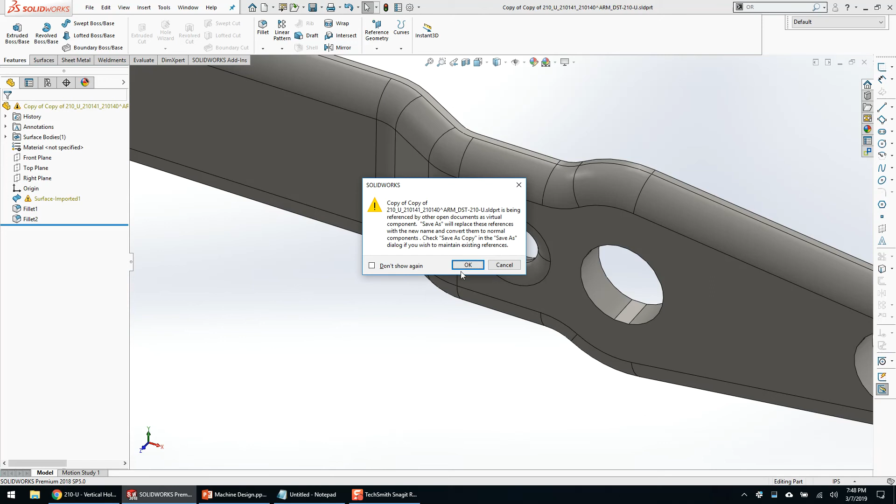All right, now let's save this off to our desktop as another STL. And let's change our options from fine to custom. Let's really crank that baby up. Deviation is super small. Whoa, look at that preview. Who's excited to open this up?

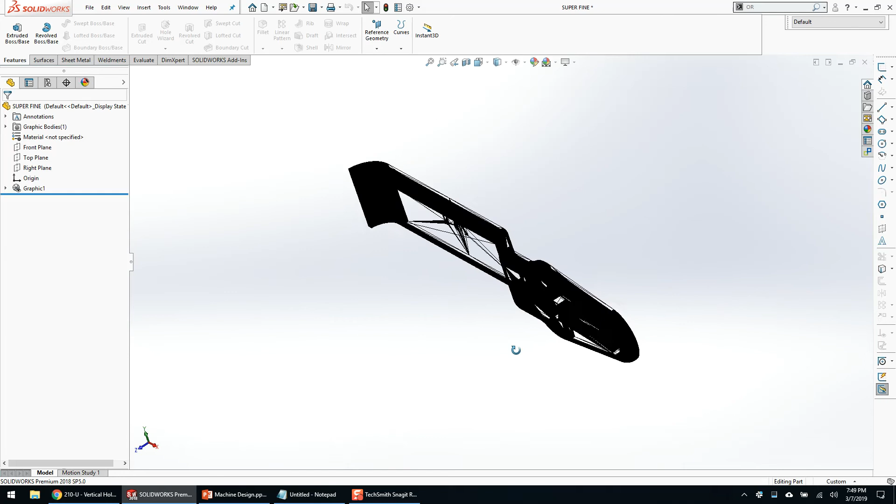All right, so this is what it looks like when you turn your system settings on max. Your graphics card is processing every one of these triangles as you're opening and rotating and messing with your model. There are so many triangles and lines there it looks like a solid edge, but as you zoom in, you can kind of see. These triangles are going lengthwise around that fillet, and these hole fillets here are even worse. Look at that. This is what I was trying to find from a triangle standpoint.

This is a really good example of triangle mesh. So those three points are just ever so small or ever tighter together to get the triangle surface so much smaller. And with more triangles, you get a more specific and precise appearance.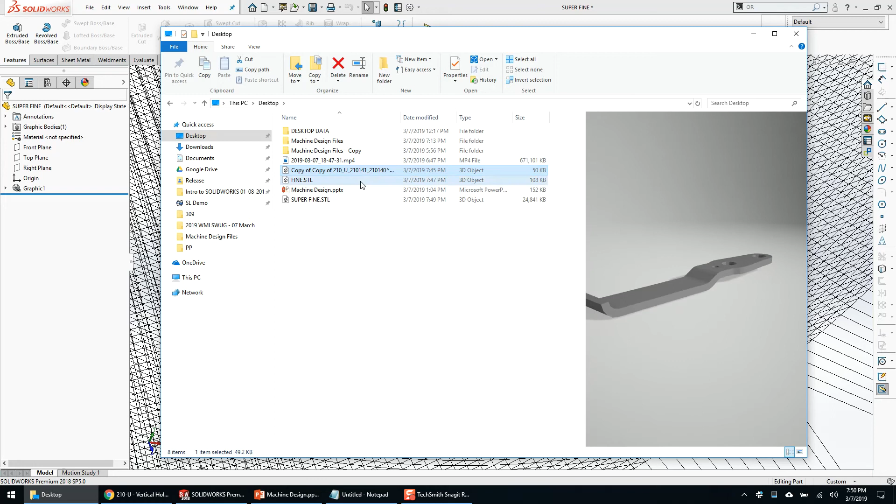Now the file size of these is going to be interesting, not the video. That's the original, the coarse one is 50 kilobytes, so you could fit like several hundred of those on a floppy drive, right? Nothing. The fine one is 100 kilobytes, so twice the size. The super fine is 24 megs. So you went from hundreds on a flash drive, whatever, a lot less, about half as many because it's about twice the file size, to 24 megs. You'd need a dozen, not flash drives, floppy disks, your 3.5 inch floppy disks. 24 megs is huge from a 3D print file standpoint.

But if you need the precision and you have the printer to do it, that's how you do it. Now, a lot of the printers are really good, they're doing post-processing like in SolidWorks itself, so it saves you the STL round trip file. But you can see the number of triangles, and that's what 3D CAD is trying to do all the time based on your system settings. That's why if you have this text in here, it might seem like it's not a big deal, but that text has all of those triangles built into it all of the time in the back of the graphics engine.

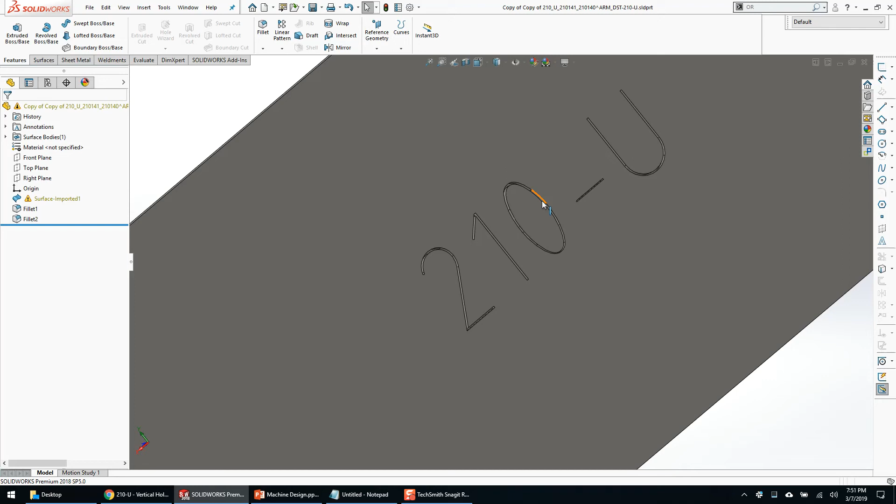Especially if you had a 16 position dial, and you had 3 or 4 of these in every station, and you circular pattern that, your graphics GPU hit would go up a magnitude of effort. But in my simple design, if you've got 3 or 4 and you're not patterning anything, I probably won't notice a discernible difference. For those of you that care, an easy way to clean this up is to just draw a box over it and extrude it out to the other side.

Why? Is it because it's a surface? But I was filleting the surface. All right, fine. So if it's a surface, we'll go to surfaces, trim surface, and under standard, there's my trim. We're gonna keep that. And now I can click on that and delete the hole.

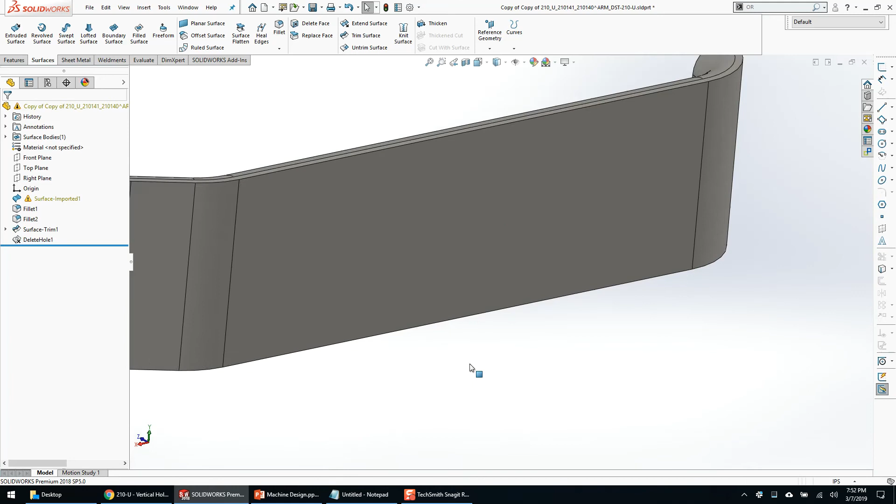Here's the sneak peek, the pro tip. Same thing like we're talking about hard edges and soft edges. In SolidWorks, if you're doing surfacing, a blue hard edge is the edge of a surface, and a black hard edge is the edge of a knit surface or a solid.

So this instance is a blue edge. Anytime you see a blue edge that's encompassed by a single face, you can click on that blue edge and hit the delete key, and it'll ask if you want to delete the feature or delete the whole bracket holes. The funny thing is it doesn't give you an option to pick multiple holes, just one hole. So a lot of times I see a feature tree filled with hole deletes because you just pick a hole and delete, pick a hole and delete. But if you go back and edit the delete hole, it'll actually let you pick more than one.

It's a super secret trick that isn't well known. What? I did not know that. Yeah, see, there you go. Todd learned something. Mission accomplished. Yeah, and you have a feature tree full of them, don't you?

I don't usually have to delete that many, but I use that feature all the time. You can go back and edit it, and pick as many as you want. As long as it'll build one, it'll build all of them.

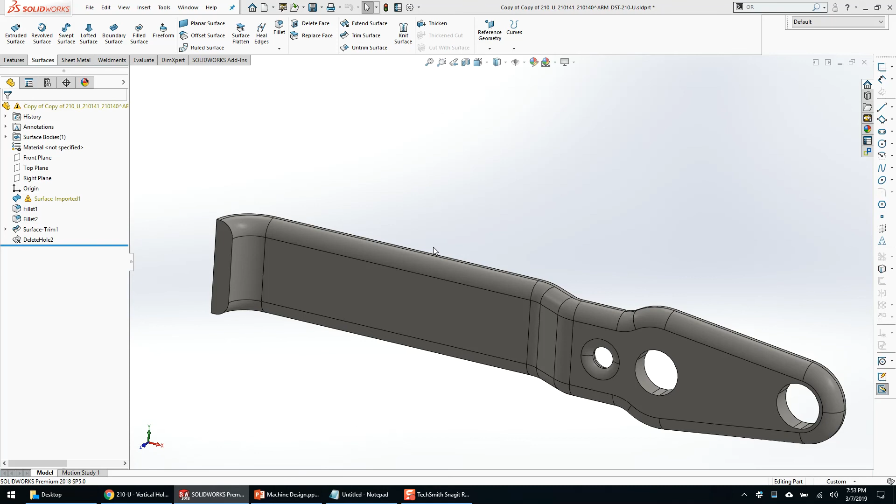So that's how I would delete out those there. Now I've probably broken it. Well, maybe not, I might not have broken enough things that the assembly still works. No, I don't want to save it. Go away.

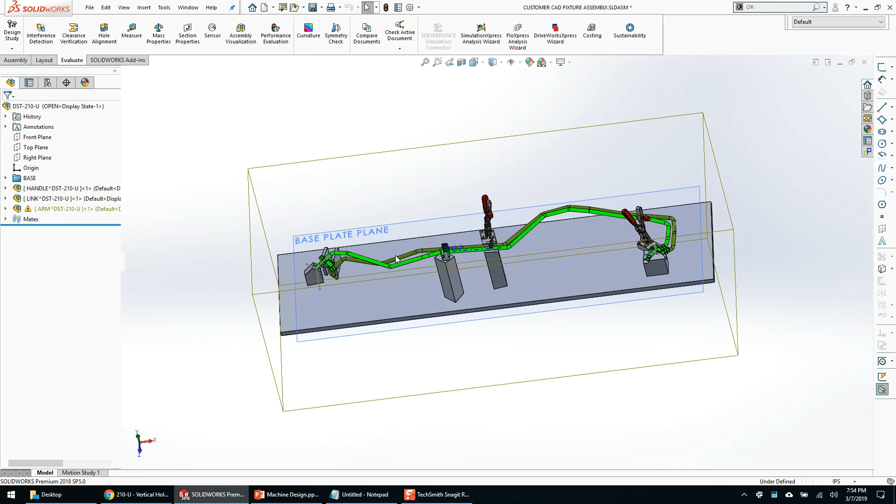A slight rabbit trail off machine design, but that's what you need to know about triangles. Yeah, I think I broke a few things and this is no longer working. So we'll just, perhaps this side, I think. We'll just delete all those features in a minute. It's still angry, but okay. I don't know if my configurations are going to work anymore, I guess. Yeah, they do. All right, we'll figure out what's wrong with it.

Oh, it's just that one part has an error. The mates are fine, okay, no problem. So that's that. I wanted to do one more quick detail. I think I got 5 minutes, maybe we can figure this out.

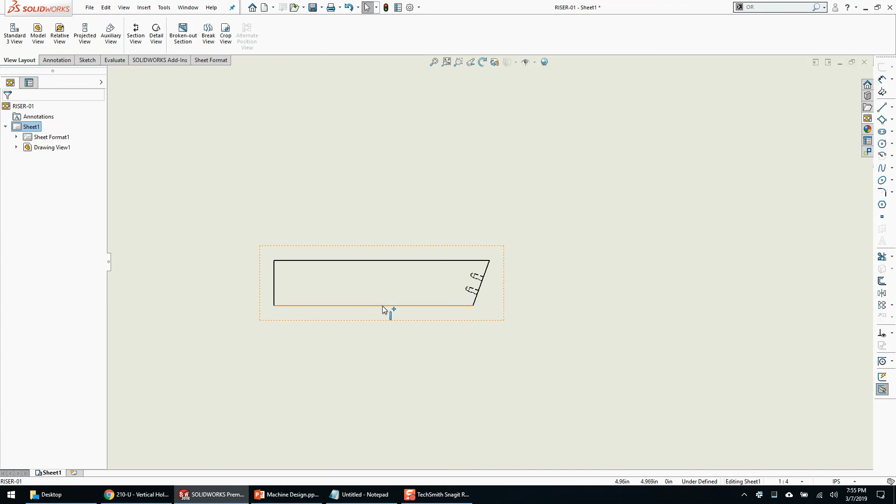So I want to make a detail of this. We'll just pretend those 2 holes is all we need. Click on my handy dandy drawing button because I added that to my toolbar. So let's grab this, rotate it 90 degrees, actually 70 degrees. Because again, if my vice stop is on the left-hand side, I want any side milling or anything that has to be done on the right-hand side. So let's say I set this up, no problem.

Let's throw on some token dimensions. Let's say that, right, let's say we've got this, no problem. Now we all know that we can do an auxiliary view off an edge, which is going to be on an angle. But now how do I dimension those holes?

That's always the problem. The people who don't know any better dimension off a virtual edge, and then they say, what do you mean, machinist? Why can't you use an edge finder to pick that up? That seems perfectly logical, it worked in CAD. If I couldn't put an ordinate on it in CAD, then, or if I can put an ordinate on in CAD, then surely you can make it.

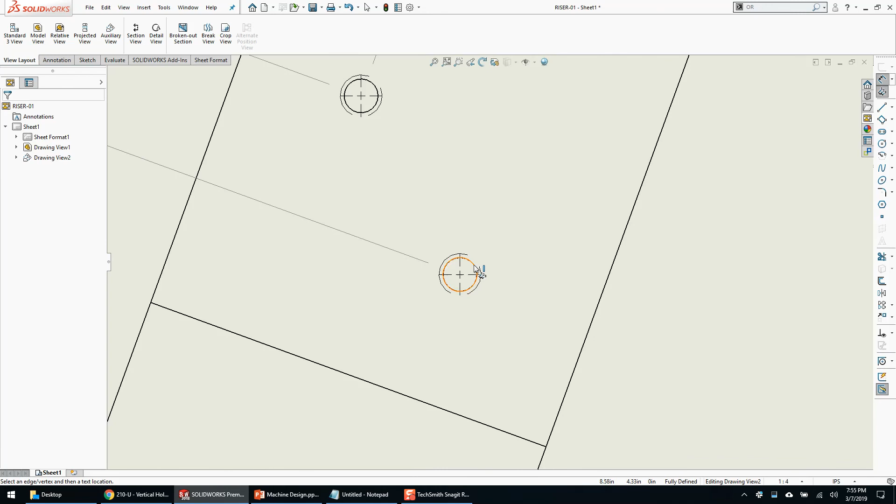Right? Who among you thinks this is an acceptable way to detail those holes? Good, I did not see a single hand. How would you detail those holes? What would be an acceptable way? Construction hole. Thank you very much, gentlemen, I appreciate you being in here.

So let's set up a construction hole. This is my own little preferential twist on a construction hole. Let's do clearance holes, because we don't need them to be press fit, blind is fine, double diameter plus some is good.

When and where possible, I always like to add 2 construction holes. Why, you might ask? Does anybody have an idea? Radar knows this stuff. Because I don't have to side mill it, if I can set up the construction holes on the vise or on a right angle plate or whatever it might be, I'm just going to make these equal in a minute.

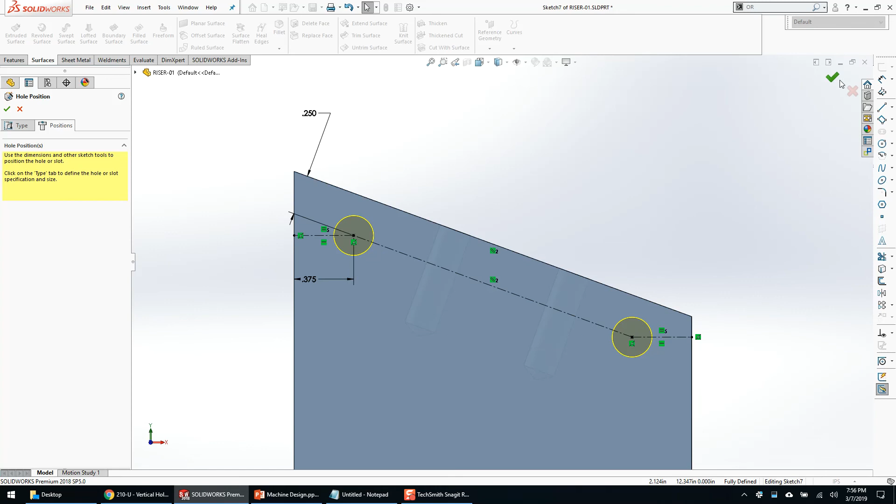Now you don't need a sine plate in the tank, or side mill it. If possible, I like side milling because it's accurate, but if CNC your holes are accurate too. So if you have reamed holes in the end of that, the reamed holes are gonna be more accurate.

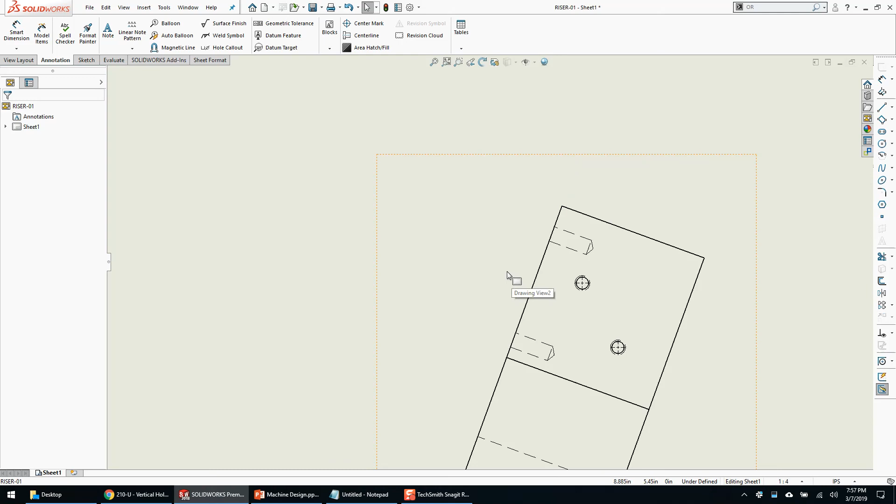So the main benefit here is, let's say I call out my ordinates. Even on a manual - I did a project for a customer a while ago, and they wanted to build everything on a manual because they didn't believe in CNCs. No joke. All right, fine, no problem, we will give you a print package that you can make on a manual. You can put 2 holes very accurately in an XYZ plane and drill them and tap them, or drill them and ream them, no problem.

Well then, I could, and we'll try to simulate this in CAD. I can then put this and try to rotate this a little bit. Pretend that's horizontal. I can then on a right angle plate, or a right angle block, or if this isn't so long, I could do like 12 jaws on a vise. You could then take this, set it down, make sure those dowels are set down on that flat parallel surface, clamp it down, C-clamp it, whatever you need to do.

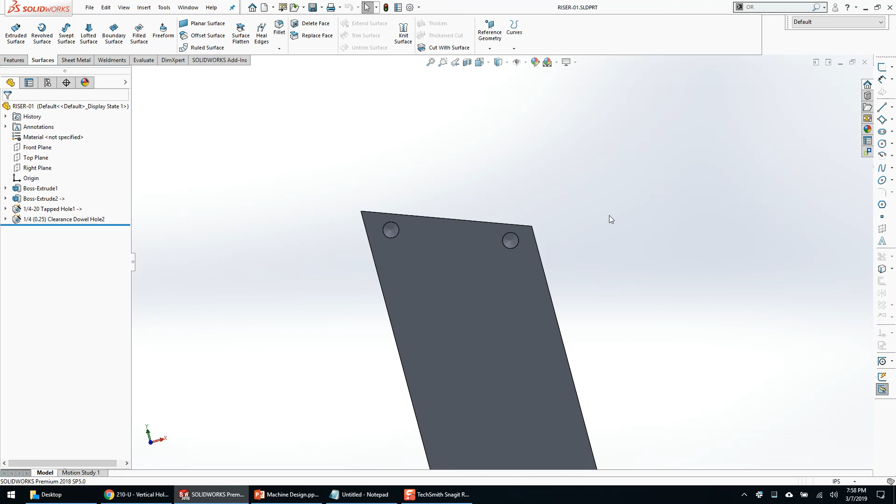And now, when you do that, this angle isn't cut yet. So pretend that you've still got this material here. I can now cut down and end mill, side mill down to that angle. The way that we accomplish that is, to be nice, we give them a dimension from our angle to the top of our dowel. So they can come down on Z, touch off the end mill on top of that dowel, move up, and just buzz cut that entire top off.

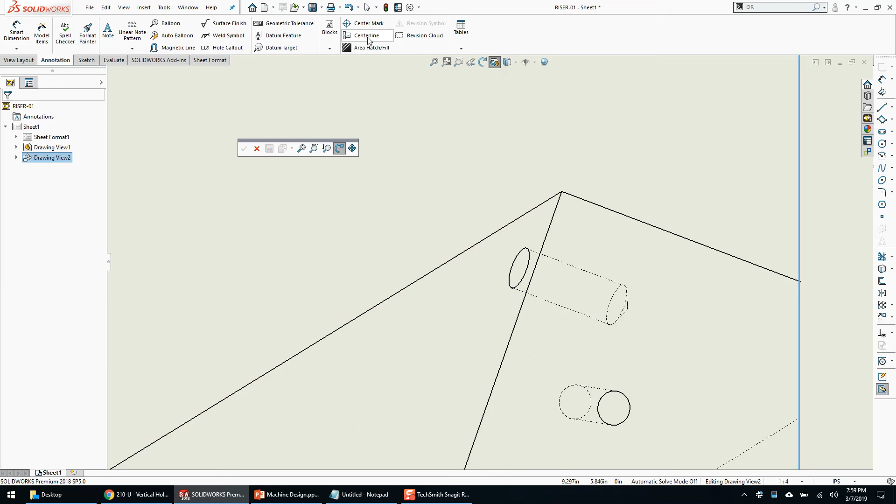Now for the placement of these holes, I want to do my 3D rotate view, and then take my center line and drop a center line in those dowels, exit my 3D rotate view, and then I can take an ordinate dimension and very precisely from those dowels decide where that's going to be. So again, I can edge find off my dowel, find out where the middle is, go to the middle, and then that's my 0 ordinate. Now I can very accurately put those dowel holes in.

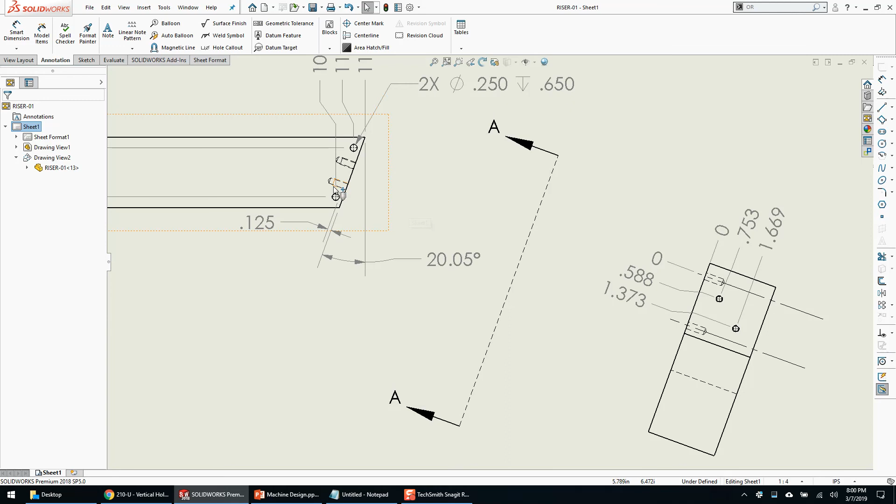No sine plate needed, no machinist math needed. Again, I have nothing against the guys cutting stock on the saw or the machinist using math, having a calculator, having a sine block. But if the computer can do it for me, if I can create a more accurate part for less money, with greater ease, have a better relationship with the machinist, and not have all these possibilities for error, the better off everyone's going to be. So adding 2 holes, if acceptable in the design, which it's not always, but if acceptable, adding these 2 holes, whether it's CNC or manual mill, will reduce the cost and increase the quality of that particular detail.